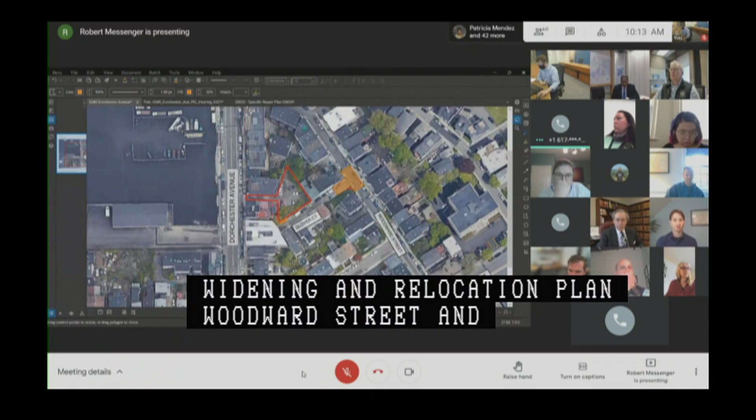This was brought under new business on March 11, 2021, as shown on a plan entitled City of Boston Public Works Department, Engineering Division, Widening and Relocation Plan, Woodward Street and Glover Court, South Boston, one sheet dated March 3, 2021.

Yes, hello, my name is Brian Kaplan. I'm one of the proponents for this. With me here is Robert Messenger, who has shared his screen, and Michael Littman from Howard, Stein, and Hudson. As you mentioned, we have a widening and relocation petition and a specific repairs petition.

So this is related to a site near Andrew Square in South Boston. Woodward Street runs from Dorchester Street to Dorchester Ave, and Glover Court is off of Woodward Street, and it's that intersection of Woodward and Glover that this is focused on. The site in red outline is 9 Glover Court, also known as 534 Dorchester Ave rear, which is the site that we have approved plans to redevelop, and is how we are here today.

I will let Robert go through the specifics of the detail, but I will add that we had a community meeting the other night on this, and previously had talked with Andrew Square and some abutters directly. Everybody was okay with the plan and in support of it. We had no objection. We've got a handful of letters of support, and Linda from the Andrew Square Civic Association, who was at the abutters meeting, was also in support of it.

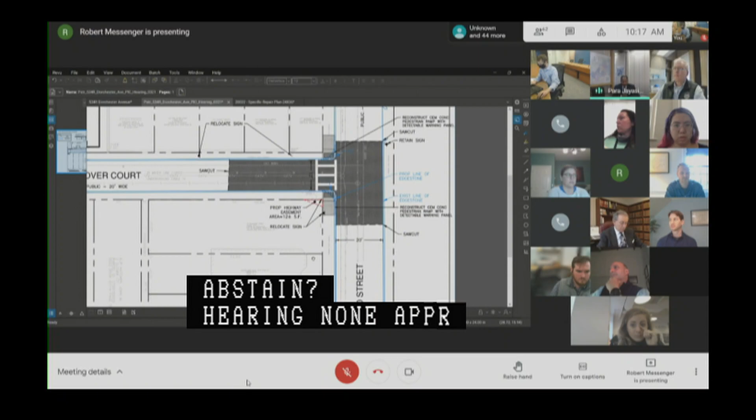On a joint petition by 9 Glover Court LLC and 35 Woodward Street Condominium Trust for the making of specific repairs within the following public ways in South Boston, consisting of curb realignment, sidewalk, and pedestrian ramp reconstruction, as well as new flush crosswalks. Glover Court, generally between address number 9 and Woodward Street, generally at Glover Court. This was brought under new business on March 11th of this year, 2021, as shown on the plan entitled City of Boston Public Works Department, Engineering Division Specific Repair Plan, Woodward Street, Glover Court, 534R Dorchester Ave, South Boston, one sheet dated February 10, 2021.

Thank you. And back to the specific repair illustrative here. The building has frontage along Glover Court, and there is an outdoor parking space that requires a driveway curb cut. So we're proposing a 10-foot wide curb cut to access this space, and it's standard city detail for sidewalks less than 7 feet.

Additionally, the specific repairs we're petitioning were intersection improvements at Woodward Street and Glover Court. And we coordinated with the city agencies after the public hearing. We got feedback from them, which landed on a regrading approach. This would provide better access to Glover Court as well as improve the pedestrian access at the intersection.

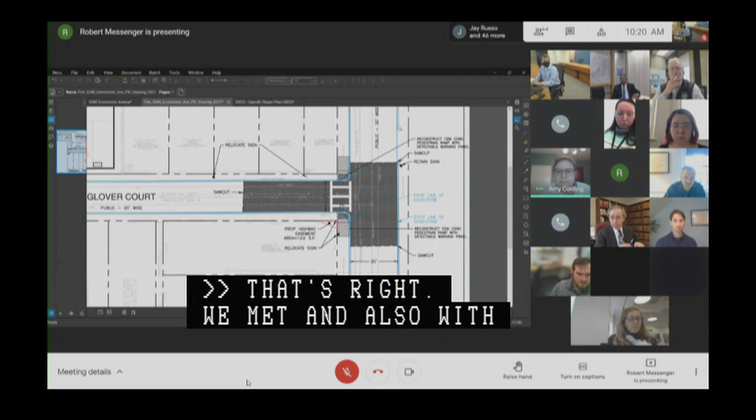Thank you, Bob. So I'm going to assume you have had conversations with the public works staff, because under new business, I believe you were showing either a raised tabletop or a speed hump or something like that, if my memory serves me correctly. Yeah, that's correct. We met with BTD, Todd from PSC Disabilities, and Zach was there. Discussed. Awesome. Okay. Yeah, we landed on this approach and got rid of that previous design.

Thank you, Bob. Appreciate you doing that follow through. Any questions or comments by commission members? Hearing none. Mr. Lining, any comments by PIC staff and or the audience for today? No, all set on both counts.

Then I'd like to hear a motion regarding hearing number 2. I'll make a motion to approve a joint petition by 9 Glover Court LLC and 35 Woodward Street Condominium Trust for the making of specific repairs in Glover Court and Woodward Street as read into the record by the chair. Second. All in favor? Aye. Aye. Anyone opposed or abstain? Hearing none, motion passes. Thank you, Brian.

Thank you. Public hearing number 3 on a joint petition by the Massachusetts Bay Transportation Authority, the City of Boston Transportation Department, and the City of Boston Public Works Department for the making of specific repairs within the following public ways in Roslindale, consisting of curb realignment, sidewalks, and roadway reconstruction, as well as new and relocated pedestrian ramps, specialty pavement, street lights, street trees, street furniture, bike racks, transit information kiosks, and a raised crosswalk. Corinth Street, southeast of Cohasset Street, Cohasset Street at Corinth Street, Poplar Street, south of South Street, South Street at Poplar Street, and Taft Hill Terrace.

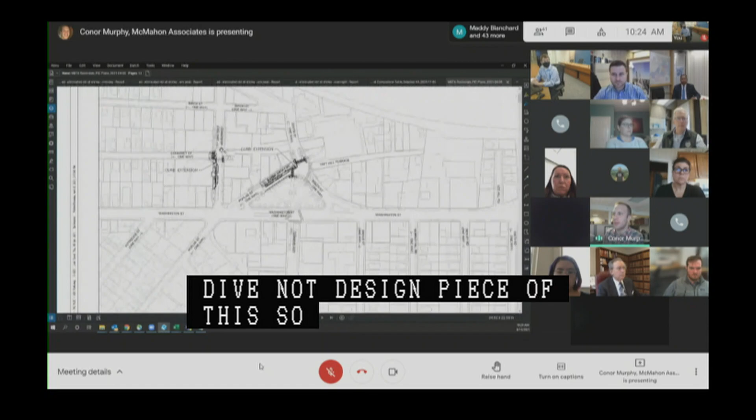It's about a 150-foot proposed curb extension that we're looking to put in on Corinth Street on the far side of Cohasset Street. It's a 6-foot wide curb extension, about 150 feet down. There will be 2 bus berths that we'll be able to fit on this curb extension, shown on the plans here.

There'll be some street lighting changes to push a few street lights against the new proposed curb, based on comments from Public Works Street Lighting Division. We're also shifting a street light at the ramp crossing Corinth Street outside of the ramp berth, improving the ramp in that case as well.

We are also proposing a bus shelter in the middle of the bus stop, placed so it will not block the Bank of America entrance shown right here, and to avoid existing tree pits and other street furniture along Corinth Street. Parks Department has agreed to close the empty tree pit shown here for placement at that location, so we've done the coordination there.

We are also proposing a raised crossing to go across Cohasset Street. This is based on coordination with Public Works Department, BTD, and Disabilities to address design issues including the alignments of the 2 ramps going across Cohasset Street, the path of travel, existing grading along Cohasset and Corinth Street, and the building entrances at both the Bank of America and the Fornax entrances on both sides of the crossing.

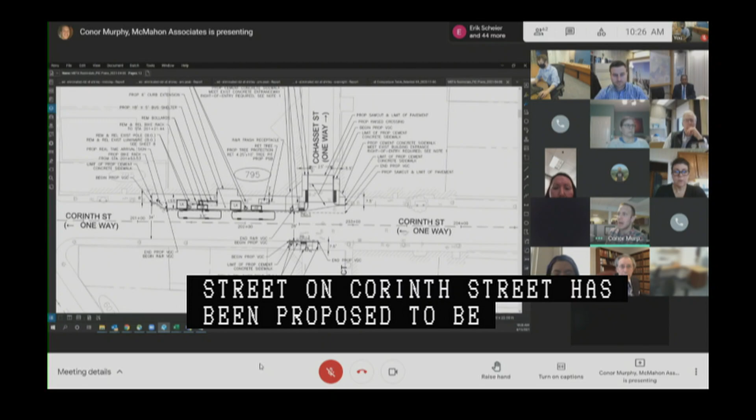The ramp across the street on Corinth Street has been proposed to be reconstructed, with the specific design coordinated with Public Works Department and other agencies to meet needs identified in the coordination process. Since the new business, nothing has really substantially changed at this stop. So that's pretty much what I have here. Are there any questions related to Corinth Street?

Good morning, Connor, Matt. I have a quick question, actually something we sent a comment in about a couple weeks ago. We have a hydrant there near Taft Court, at that handicap ramp, and we prefer to keep the hydrant where it is. So we just want to make sure that it's not in the ramping.

No, this was coordinated with Zach based on that continuity. There's a curb that will be going in to frame that hydrant, so it's not going to be in the flare itself, where the ramp was constructed there. And a detail has been added to the plan set, which I can pull up.

Oh, there it is. And we did add a detail specifically for that ramp to be included in the grading, reflects that as well.

Oh, okay, that's great. When you get a chance, if you don't mind, just send that to us. Yep, absolutely, I can forward it to you. Profiles, no problem, I'll send it over as soon as I'm done talking. After the meeting, yeah, that's fine. Okay, thank you, Connor, appreciate it.

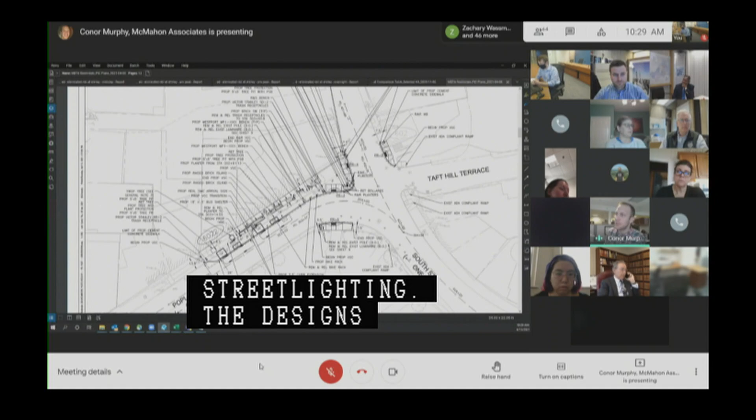entrances at the back of sidewalk where possible, based on the existing grading and whatnot. There was also support from Public Works to retain the aesthetics of existing brick and tree zones. So pedestrian desire lines are basically predetermined based on some of the coordination and what we were looking to do with the existing brick and paths of travel.

So we have raised brick areas here and here, which are shown on the plans. The existing path of travel will be in front and behind those, based on the existing grading challenges, in coordination with Public Works, disabilities, and the MBTA as well.

Curb ramps 3, 4, 5, and 6 have been proposed for reconstruction to realign them based on coordination. Any ramp not shown to be redone here has been checked for ADA compliance and they do pass.

The brick areas adjacent to the layout of benches over here were requested by the BTD transit team, and those are flush with the sidewalk, they are not raised. We did make a couple of slight changes to the amount of curb shown behind the shelter over here, and the layout of a couple of bike racks and whatnot, based on further coordination with Public Works over the last three weeks.

So that's really the only change since new business, and it was agreed upon with Public Works, so there should be no coordination issues with that. It was just us addressing a couple of concerns.

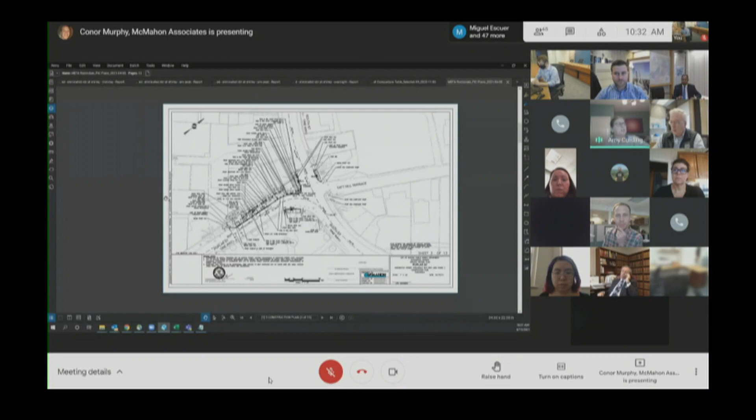At this point, I'd like to entertain a motion on this item. I'll make a motion to approve a joint petition by the Massachusetts Bay Transportation Authority and the City of Boston Transportation Department and the City of Boston Public Works Department for the making of specific repairs in Corinth Street, Cohasset Street, Poplar Street, and South Street, as read in the record by the chair.

Second. All in favor? Aye. Anyone opposed or abstained? Hearing none, motion passes. Thank you, Matt.

Thank you very much. Thank you all.

Next item on the agenda, public hearing number 4, on a petition by Shipway Development LLC for the acceptance of a pedestrian easement adjacent to the following public ways in Dorchester: Dorchester Ave on its easterly side at address number 1700 and 1710, both north and south of King Street, and King Street on both sides east of Dorchester Ave.

This was brought under new business on March 25th of this year, 2021, as shown on a set of plans entitled City of Boston Public Works Department, Engineering Division Pedestrian Easement Plan, 1700 Dorchester Ave, 1710 Dorchester Ave, Dorchester, 2 sheets dated March 15, 2021.

Good morning. My name is James Downing from Howard Stein Hudson, joined this morning by Maddy Blanchard, also from Howard Stein Hudson. We're the project engineers, joined as well on the call today by Patrick Mahoney from Shipway Development, who's the petitioner. We are here to present the pedestrian easement for 1700 and 1710 Dorchester Avenue.

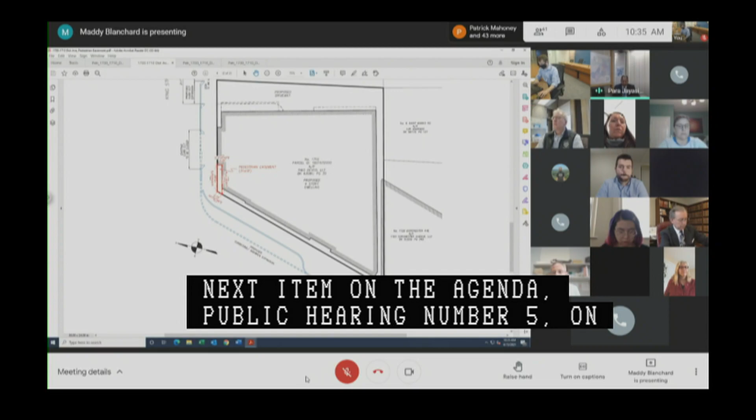Next item on the agenda, public hearing number 5, on a petition by Shipway Development LLC for the making of specific repairs within the following public ways in Dorchester, consisting of curb realignment, sidewalk reconstruction, as well as new and relocated pedestrian ramps, specialty pavement, street lights, bike racks, and driveway curb cuts. Dorchester Ave on its easterly side at address number 1700 and 1710, both north and south of King Street, on both sides east of Dorchester Ave.

This was brought under new business on March 25th of this year, as shown on a set of plans entitled City of Boston Public Works Department, Engineering Division, Specific Repair Plans, Dorchester Ave and King Street, 1700 and 1710 Dorchester Ave, Dorchester, 2 sheets dated February 26, 2021.

James. Good morning, James Downing, Howard Stein Hudson, joined by Maddy Blanchard, also from Howard Stein Hudson, and Pat from Shipway Development, who's the petitioner. We're here to present the specific repairs for developments at 1700 and 1710 Dorchester Avenue.

The project consists of the construction of 2 separate buildings either side of King Street. Right now, we're looking at the location of 1700 Dorchester Avenue, which consists of a 4-story building with a combined unit count of 36 units with 20 parking spaces.

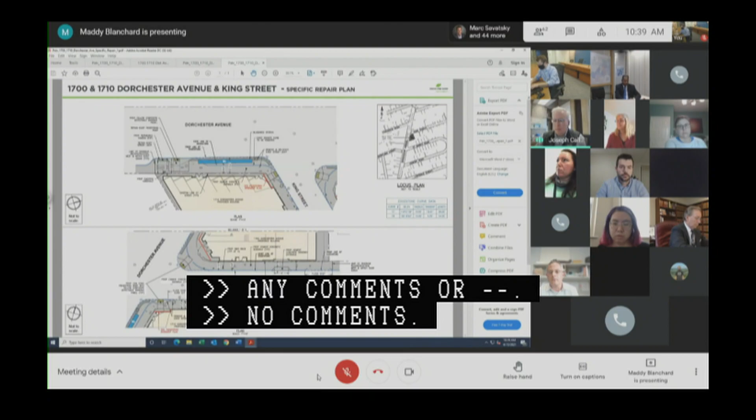I'd like to hear a motion regarding public hearing number 5. I make a motion to approve a petition by Shipway Development LLC for specific repairs in the area of Dorchester Avenue and King Street as further read into the record by the chair. Second. All in favor? Aye. Anyone opposed or abstain? Hearing none, motion passes. Thank you, James. Wish you the best. Thank you.

Next item on the agenda, public hearing number 6 on a petition by WBA Townhomes LLC for the acceptance of a pedestrian easement adjacent to Gardner Street, Public Way, West Roxbury, located on its southwesterly side at address number 178, generally northwest of VFW Parkway. This was brought under new business on March 25th, 2021, and shown on the plan entitled City of Boston Public Works Department, Engineering Division Pedestrian Easement Plan, 178 Gardner Street, West Roxbury, 1 sheet dated December 21, 2020.

Good morning, James Downing again. I'm joined this morning by Maddy Blanchard from Howard Stein Hudson. Also on the call today is Peter Davos, principal from Townhomes. We're here to present the pedestrian easement associated with development at 178 Gardner Street. The project consists of the construction of 2 3-story buildings, which would include 18 townhomes and 36 off-street parking spaces. Next slide, please, Maddie.

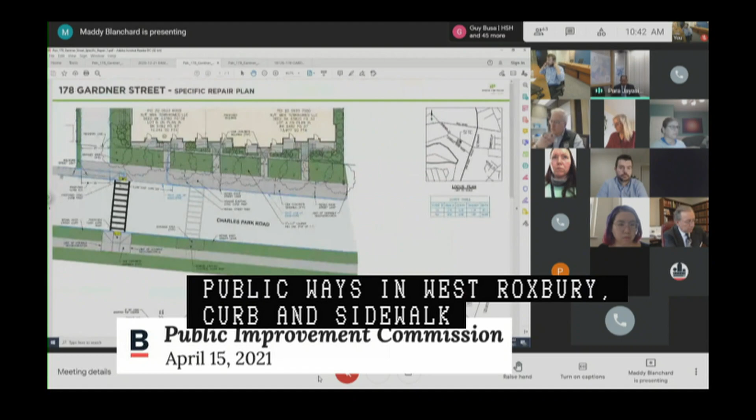Next item, public hearing number 7 on a petition by WBA Townhomes LLC for the making of specific repairs within the following public ways in Roslindale, consisting of curb and sidewalk reconstruction, as well as new and relocated pedestrian ramps, street lights, street trees, landscaping, and driveway curb cuts. Gardner Street on its southwesterly side at address number 178, generally northwest of VFW Parkway, Charles Park Road, and northeasterly side, generally northwest of VFW Parkway. This was shown under new business on March 25, 2021, and shown in the plans entitled City of Boston Public Works Department, Engineering Division Specific Repair Plan, Gardner Street, Charles Park Road, 178 Gardner Street, West Roxbury, 2 sheets dated March 16, 2021.

Good morning, James Downing, Howard Stein Hudson, joined by Maddy Blanchard, also from Howard Stein Hudson, on the call, as well as Peter Davos, principal from WBA Townhomes. We're here to present the specific repair plans for 178 Gardner Street. The project is located in the West Roxbury neighborhood. The site is bounded by Gardner Street to the north and Charles Park Road to the south.

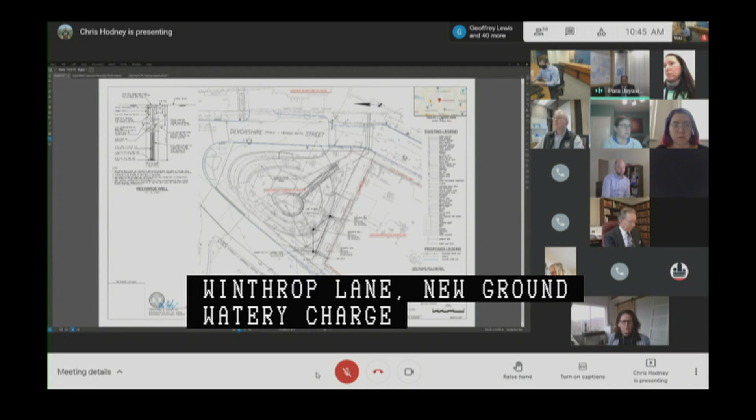Next item, public hearing number 8 on a petition by NFL SRE 1 Winthrop Square LLC for the making of specific repairs within Winthrop Square Public Way, Boston proper, located at address number 1, generally south of Winthrop Lane, consisting of new groundwater recharge infrastructure. This was shown under new business March 26th of this year, as shown in the plan entitled City of Boston Public Works Department Engineering Division specific repairs 1 Winthrop Square, Boston proper, dated March 28th.

I am getting feedback. Todd? Yes, sir. I'm getting feedback on this. He's probably on the line. Yep, Chris, I actually think that may be you. If you can just mute yourself until the presentation is all done, then unmute yourself to present. Thank you, sir. Appreciate it. Thank you, Todd.

Petition, if you could take it from here. All right, so this is, excuse me, Chris Hodney with Edge Engineering. I'm assuming you can see the plan on my screen right now. I'm here with Paul Asmar from Van Fung. Paul, are you there? Yes, I am. I'm just trying to keep my microphone off and listening to you. I'll mute while you're talking. Okay, I am here. I hope you can hear me now. Yes, Paul, you're good. Okay, great. Thank you.

All right, so the specific repair plan that we have is for 1 Winthrop Square. As I stated last time, this is not the currently underway project for the Winthrop Center Tower or the work being undertaken in the park. It's for the 1 Winthrop Square site here. The building itself is having some interior renovations done, which tripped the Boston Water and Sewer recharge requirement. The building has 2 levels of basement underneath, including a basement that extends out to the sidewalk and into Winthrop Square Park around the edge, as is typical in this part of the city.

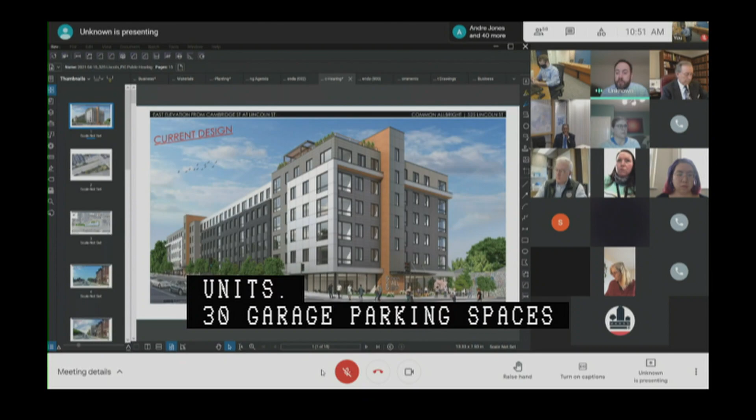That's an image of the project itself. The project is a 6-story residential project, 80 units, 30 garage parking spaces, a very bike-centric project, so 278 bicycle parking spaces associated with the project, and there's a new blue bike station proposed, a 19-stall station that we'll see in a second.

Clicking through the project just to get people acquainted, this is Cambridge Street. At the bottom, you can see I-90, with an overpass of Cambridge Street over I-90. Then Lincoln Street wraps around the project site. You can see the sidewalks today, they're there, but they're pretty bare, somewhere in the 4 to 7 foot range of what's out there today.

Just a quick graphical image so you can see the scope of improvements. The project limits are here, opposite Royal Street, and then we're showing there's some parkland just off to the side here - sorry, not DOT, it's city owned. The project is here, and we're improving the entire frontage, incorporating complete streets and street trees, and several other improvements I'll run through quickly.

I won't spend a lot of time on these slides, but these are just some existing and proposed images to give you a feel for the goals of the project. Again, this is Cambridge Street along that frontage. A lot of time with the BCDC talking about what the private side of the frontage is that abuts the public sidewalk. So we have a lot of grade change on Cambridge Street, and a lot of these tiered plazas that we've incorporated to break the grade up and give that urban feel and a much nicer pedestrian experience than the current sidewalk condition.

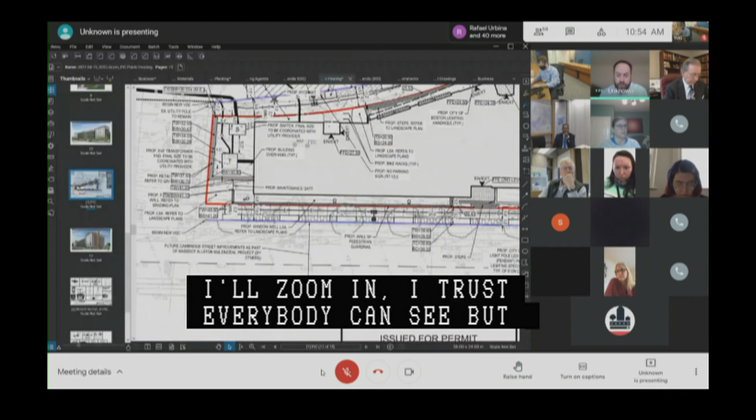The petition is for specific repairs on those two streets, Cambridge and Lincoln Street. So I'll zoom in - I trust everybody can see, but let me know if not. This is Cambridge Street starting closer to the bridge and then working down the hill.

We're getting back to matching the existing sidewalk width. We have a 5.3 foot sidewalk with 3 foot deep, 8 foot wide tree pits, with very standard 30-foot spacing. We introduced 24 new street trees that don't exist today, and 12 new decorative light poles. You can see one of the light poles here, wrapping all the way around the perimeter, with street trees and decorative light poles at approximately 90-foot spacing along the frontage, Cambridge Street and Lincoln.

We have a little bit of a road change, so that treatment comes all the way down here. We do restripe this sidewalk. There have been some signal improvements recently by the city at this area, so we think it's in good shape. We did hear a concern with the loops, that they might not be working appropriately. In conversation with BTD, we believe they may be recently upgraded, but we did add into the scope to put new loop detectors in when we do our paving, which makes sense since we are milling and overlaying this section.

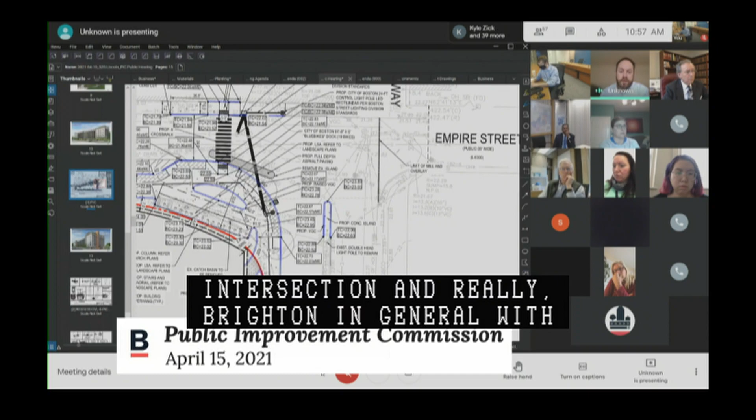One of the key points was Lincoln Street and how do we calm traffic, slow things down. We heard that in the Allston Brighton mobility study, as well as through our community process and our BPDA process, the neighborhood and city alike were asking for some mitigation or traffic calming measures. So we're pulling this curb line way out to shrink this to a more reasonable width and radius at this intersection. It goes down to a 24-foot width here, and that's where we pull that curb line out and get rid of this.

There is an island in the middle today that goes away, and this becomes a more traditional intersection. Still very generous for truck movements and things like that that may need to occur here, but much tighter and better controlled, and this island is part of it.

But really, the curb line's the bigger move, and one of the benefits is it allows us to introduce this crossing now at a much more pedestrian scale. Instead of crossing approximately 50 to 60 feet, we've shortened that to a 24-foot crossing. So much needed improvement there for pedestrian access, and we introduce a corresponding ramp on the other side.

On the Boston Lighting side, this was very important to them, the lighting system is very stressed in this area, with a lot of development and improvements introducing decorative lighting, sometimes to supplement or replace the old high pole lighting. So to do that, they didn't have sufficient power to add all the decorative lighting we're proposing, and frankly they didn't have enough to do what they wanted elsewhere in the system.

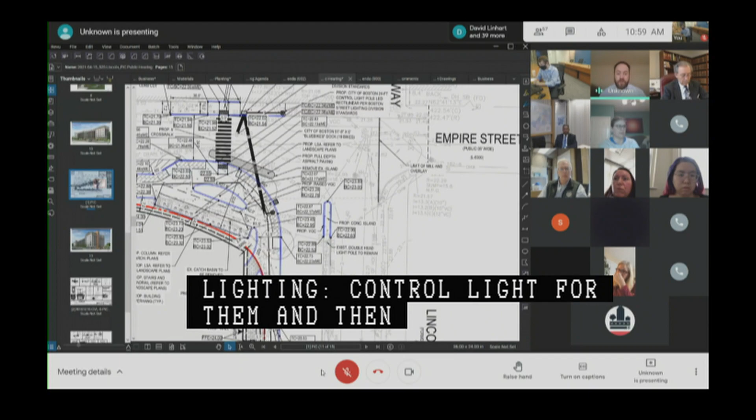So we're pulling new power out of this manhole to a new control box for Boston Lighting, introducing another light over here as a control light for them, and then feeding back across to our side to feed the lights on our project, continuing with measures for them to keep increasing their lighting along Cambridge Street. This box and control light are meant to continue servicing whether it goes up Empire Street or on the opposite side of Lincoln Street. So very important to Boston Lighting to get some of those improvements incorporated as part of the project.

Also at this intersection, we're taking advantage of the space here to put the 19 station blue bike in a very visible spot. We think it's a nice way to do this particular station because we've really put the walkway on the outside, so this is more the heavy traffic flow. If you have a lot of pedestrian activity at the same time as a lot of blue bike activity, the blue bikes have their own zone separate from the main walking path.

So really good use of this space, and we've introduced a raised planter in the middle to break that up and break down the scale of the sidewalk width there. We think that's very effective. Then back to a more traditional treatment of street trees and impervious pavers, with generally a 6.5 to 7 foot sidewalk width along the remainder of Lincoln Street, tapering back down to meet the 7 foot concrete sidewalk at the property line. So that's a lot of frontage here, but hopefully a good overview of what we're trying to accomplish and how we've done that.

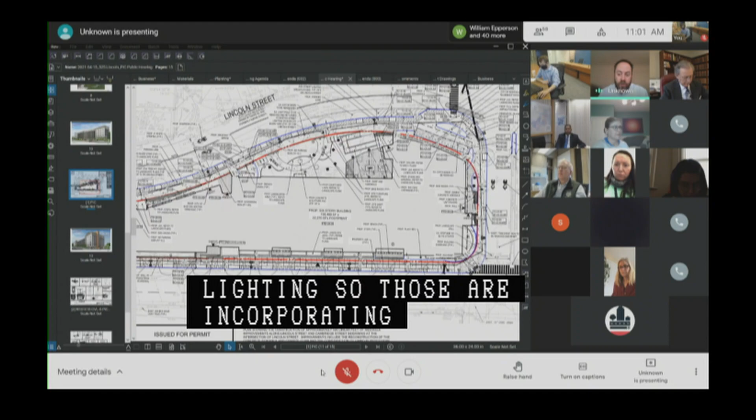We do have stormwater systems on site on the private property, the 1.25 inch Boston Water and Sewer infiltration system, so that works well. We have the shadow fiber conduits following those, the lighting conduits, so those are incorporated in the plans. The limits of mill and overlay along Lincoln Street, full curb to curb, are on the plans. I mentioned the new loop detectors as well.

And with that, I'll open it up. If there's any questions for me or ownership or legal counsel, we're happy to answer any questions.

Thank you, Steve. I appreciate that very thorough presentation.

Steve, I have a small point, and I'm a bit embarrassed that I didn't catch it the last time. Could you move your screen so it is at the intersection of Lincoln? Yeah, right there, perfect, don't go too much. Actually, if you could zoom back a little bit. So my point, and I need Amy's guidance on this.

There's a median currently along Lincoln Street as it comes towards Cambridge Street, correct? There's a median, correct, right. At the top end of your screen, the blue color markings where you are adjusting right there. So that median, the limits of it may have made sense when we had that wide intersection, but now that you've tightened the intersection, do you see any value in extending the limits of that median a little bit to the northern part, to the top of your screen? That way, traffic coming off Cambridge from Lincoln to the Empire intersection is more of a defined area rather than a free-for-all.

Amy, did I miss anything? That's the blue line - the median island's going out with the curb line. Can it be extended even further up to align with the straight line of Empire Street, when you think about the sidewalks? I think it can go up a little bit, though I hate to do this now. The concern is not sticking over the crosswalk - bring it up a little. It's a really crude drawing, but you captured what I'm trying to mumble here.

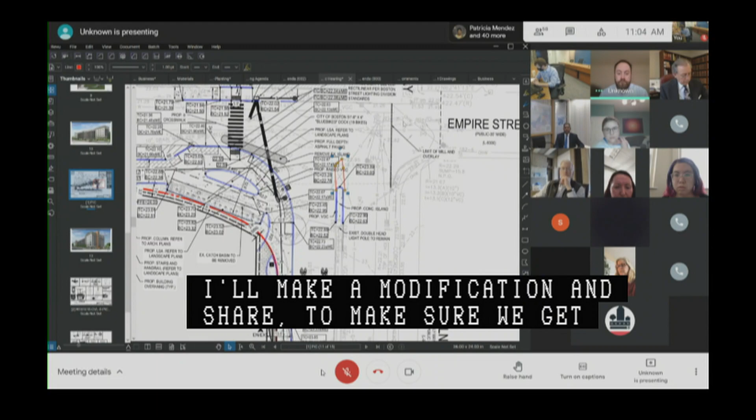Steve, I appreciate that consideration on your part. Sure. Any other comments by fellow commission members? Oh, good morning, I just had a quick comment.

So at Lincoln and Cambridge Street, you have a note for an existing catch basin to be converted to a drain manhole with new frame and cover. I just want to check, were you trying to install a drop inlet? We are - it's a really shallow one, so we're putting a drop inlet here, and that's where the current catch basin is.

Just with this curb line moving out, there were some shallow conditions there, and we thought this would be the best situation. So that's the intent there. Oh okay, great - if you could just put that note on the drawing, that would be great. Sure, yeah, absolutely, thank you.

And then just a small minor thing - I know you brought it up last time - are you continuing to work with our department on the site plan, through the site plan review process? Yes, yeah, absolutely we are. Thank you, and we'll make sure that gets into the Boston Water and Sewer drawings as well. Okay, awesome, thank you. You're welcome. Thank you, Denise. Thank you, Steve.

Any other comments by fellow commission members? Hearing none, before I ask Mr. Liming the status of your maintenance agreement - truly appreciative of all the improvements you are doing. I'm going to assume that there's a very solid maintenance agreement that has been forged and about to be signed, or has been signed, or we are very close to signing. Would that be the case, Mr. Liming? Yes, we're working on a maintenance agreement with them, and I will mention that this maintenance agreement will speak to the snow removal from all of the sidewalks, especially at the corner of Lincoln Street and Empire Street, where you have kind of an inside and outside sidewalk situation with an island in the middle.

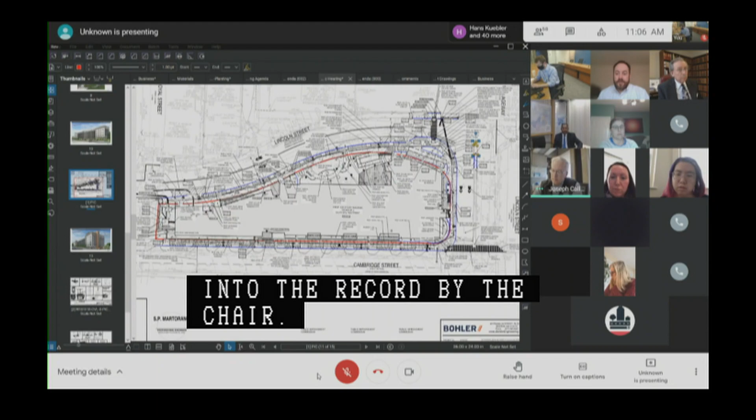That being the state, I'd like to hear a motion regarding public hearing number 9. I make a motion to approve a petition by Albright Realty LLC for specific repairs in the area of Lincoln Street and Cambridge Street, as further read into the record by the chair. Second. All in favor? Aye. Anyone opposed or abstained? Hearing none, motion passes. Thank you, Steve. Thank you, everyone. Thank you very much. Thank you.

Next item on the agenda, public hearing number 10, on a petition by Bartlett Place Land, Inc. for the widening and relocation of the existing right-of-way lines of Lambert Avenue, a public way in Roxbury, located on its southeasterly side between Bartlett Street and Gill Street. This was brought under new business on March 25th of this year, as shown on a plan entitled City of Boston Public Works Department, Engineering Division, Widening and Relocation, Lambert Ave, Public Way, Roxbury, one sheet dated March 10th, 2021. Good morning.

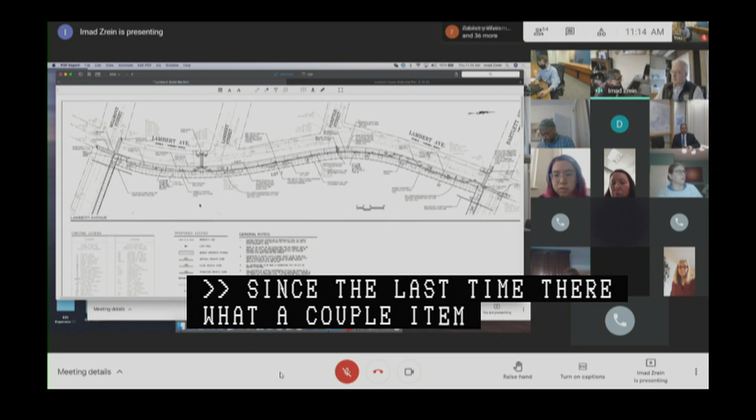Particularly was the radii for the bump outs. As Mr. Liming requested, we changed all those radii to 10-foot radii only coming in and out, as you can see in this bump out here and these bump outs here.

There were also some questions regarding the curb ramps. We've since coordinated with Ms. Long, and we've added some detectable warning on the reciprocal ramp. We've also added an additional ramp along the intersection of Lambert and Bartlett on the reciprocal side to make that more accessible.

The project as a whole, as you can see on this sheet here for Lambert Ave, we are adding those parking spaces we just talked about in the previous hearing. There are 21 parking spaces with new granite curb, street trees, and a 9.5-foot sidewalk.

The rest of the project entails work on Gill Street and Bartlett Street. On those two streets, we're basically extending the phase 1 reconstruction of the sidewalk—reconstruction of the sidewalk, resetting the curb, and adding new street trees where we can within the right-of-way, particularly on Bartlett Street, where we added 5 new trees. That's basically it.

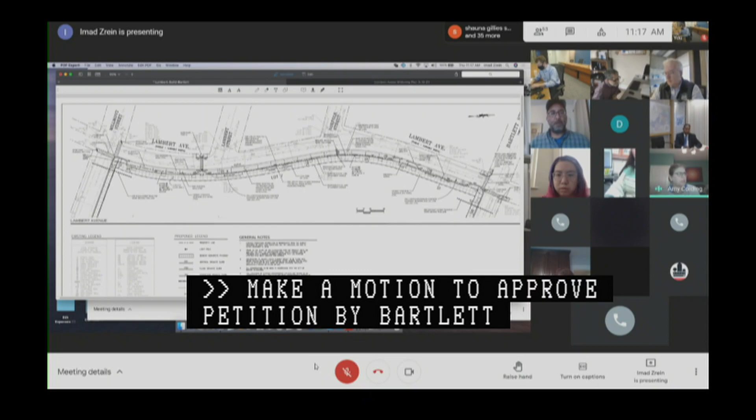Second. Second. All in favor? Aye. Anyone opposed or abstaining? Hearing none, motion passes. Thank you, folks. Thank you, guys.

Thank you. Next item on the agenda, the last public hearing, number 12, on a petition by ExteNet Systems Inc. for a grant of location with lead company status and no participants to install new telecommunication conduits with city shadow duct within the following public ways in East Boston: Maverick Square between Winthrop Street and Sumner Street, Winthrop Street between Paris Street and Maverick Square, Paris Street northeast of Winthrop Square, Sumner Street southeast of Maverick Square.

This was brought under new business on March 25th, 2021, as shown on a set of plans entitled City of Boston Public Works Department Engineering Division Grant of Location Plan, Winthrop Street, Maverick Square, Sumner Street, Boston, 5 sheets dated December 2020.

Good morning, everyone. Dave Gajan with NBNC on behalf of ExteNet, joined by Dan Ryan, NBNC Engineering Manager. Dan is pulling up our project plans.

So as you mentioned, ExteNet is seeking a grant of location for the placement of fiber conduit, city shadow duct. This will be in support of new proposed small cell installations, part of a larger ongoing effort throughout the city for ExteNet, upgrading and expanding their network.

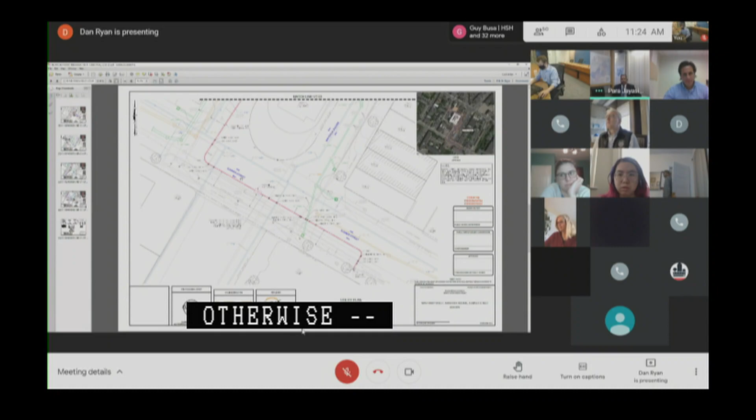All right, so let me see. Questions answered. At this point, I'd like to hear a motion by a commission member.

I'll make a motion to approve a petition by Extenet Systems for a grant of location in Maverick Street, Winthrop Street, Paris Street, and Sumner Street as read into the record by the chair. Second. All in favor, please signify by saying aye. Aye. Aye. Anyone opposed or abstain? Hearing none, motion passes. Thank you, folks.

At this point, we'll move to the new segment of our agenda. First item, Franklin Street, Boston proper, specific repairs on a petition by MCAF Winthrop LLC.

Thank you, Para. Hi, Kathy. I'm just trying to present. Kathy McNeil, my colleague Halle will pull up our presentation for what's addressed as 1 Franklin Street here, but which many of you may know as the Tontine Crescent. So, Halle, thank you. Yep.

Good afternoon, my name is Halle Thomas. I represent MCAF Winthrop, a division of Millennium Partners. I'm here today with Kathy McNeil, who just introduced herself. We are currently building the Winthrop Square building, just a couple blocks down and around the corner. We are here today with our landscape architects for the project, Shauna Gilles Smith and Curtis Puncher from Ground Landscape Architects. We are also joined by Robbie Burgess and Hans Kubler of Howard Stein Hudson, Brian Taff and Jessica Fernandez of Suffolk Construction, and Elnita Laracell of the Downtown Improvement District. So we are here today presenting the permanent construction of Tontine Crescent on Franklin Street and Downtown Crossing.

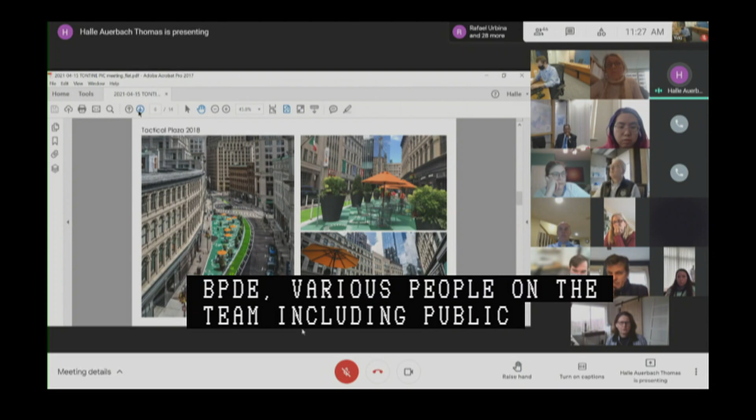After this was constructed, we did a series of traffic studies and parking studies to confirm this geometry worked. So now we are here today to present the permanent construction of that plaza. From here, I will hand it over to Shauna Ground to present the design.

Thank you very much, Halle, and hello everyone. As you can see on the screen, this is the plan of the permanent condition. With a very minor modification that Robbie will go into in a moment, the geometry follows the tactical test case that Millennium Partners, along with the City of Boston, constructed for the plaza.

Along the outboard of the plaza is a raised cycle track. The plaza is at the level of the sidewalk, leaving the existing sidewalk with the cobblestones intact, and adjacent to that is a new poured concrete sidewalk, providing a very smooth surface all the way through the plaza to the terminus at the Hawley corner.

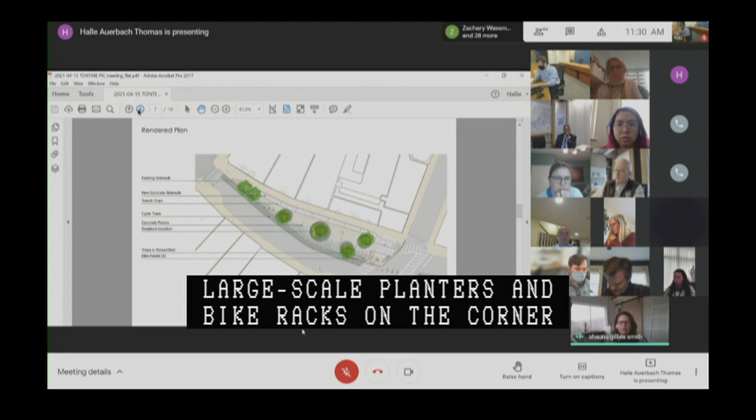An existing sculpture that was located in the middle of Franklin Street is being relocated in the middle of one of the planters, and that has been reviewed with the Art Commission.

Perhaps we could go to the next image. This gives a sense of what that feels like. You can see that the planters have a little bit of an asymmetrical seating arrangement, but there's a lot of space in between them for both movement and for the BID to set up temporary tables and chairs.

And an idea of what the planting would be. The tree species relate to the elms that are in Shoppers Park, they'll be in structural soil as well, and then there will be flowering perennials and low ground cover.

And then moving over to Robbie or Hans to go into the more specific design of the improvements. Thank you, Shauna.

Mr. Burgess from Howard Stein, I think you are on. Sorry, I was muted. Good morning. My name is Robbie Burgess from Howard Stein Hudson. Thank you, Mr. Chairperson and Commission members, for considering this project today.

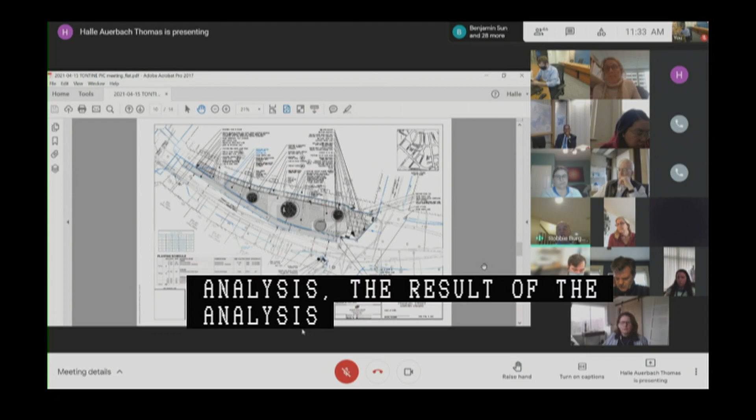This data and the analysis confirmed that the Tontine Crescent Plaza provides significant public benefits without negative impacts to the functionality of the roadway network.

So without being redundant, I'll go over some of the civil engineering elements of the plan. Moving outwards from the building face, we first have the existing granite sidewalk. These are granite slabs over areaways, or hollow sidewalks. Within these areaways are building-side utility services like gas meters, water services, etc.

We studied these granite slabs, and it was determined that it was too much of an impact to try to replace them, and there was a desire to maintain some historical relevancy of this type of material. So to address the irregularities of the granite slabs, the project proposes a cement concrete path of travel with saw cut joints, ADA compliant, adjacent to the existing granite walkway. The result is about 15 feet of walking space combined between the building frontage and the plaza area, a generous and compliant path of travel.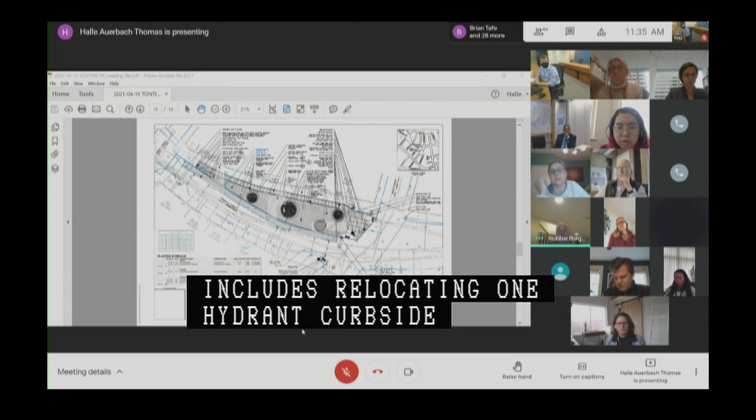We coordinated with water and sewer. The project proposes to relocate 1 existing hydrant curbside to within the new plaza on the northwest corner, and we are also proposing 1 drop inlet and sump drainage component as requested by water and sewer. The plaza drainage, a trench drain that runs most of the length of the plaza, will not be maintained by the city. So an important distinction there.

We also coordinated with Boston Transportation. The project proposes to remove the existing overhead mast arm and replace it with 10-foot signal posts, which is more consistent with a plaza experience than the steel overhead mast arm. We are also proposing a grade separated cycle track that will replace the existing at-grade bike lane. Currently, we have a full set of pavement markings, signage, and traffic signals.

Traffic signals coordinated with Boston Transportation Department at the 25/75% design level. We also coordinated with the mayor's office for persons with disabilities.

This coordination resulted in several improvements. First, the separation of the apex ramp on the northwest corner of Franklin Street into 2 perpendicular ramps. And on the southwest corner of the intersection, we are relocating a traffic signal post so that we can reconstruct a compliant ramp at that location also.

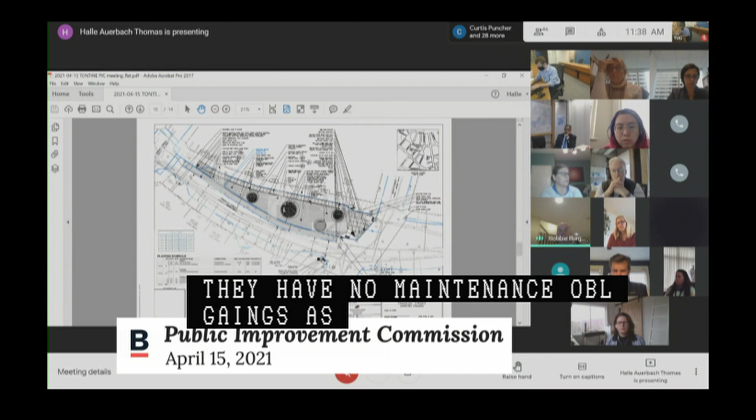We also reached out to the Parks Department and are happy to entertain any comments they may have. But an important distinction is that they have no maintenance obligations as part of the Tontine Crescent. It's all covered under the license, maintenance, and indemnification agreement.

In addition to the specific repair plans, we have 9 sheets of construction details to provide information on how we plan to construct all the elements, protect utilities, and build the project.

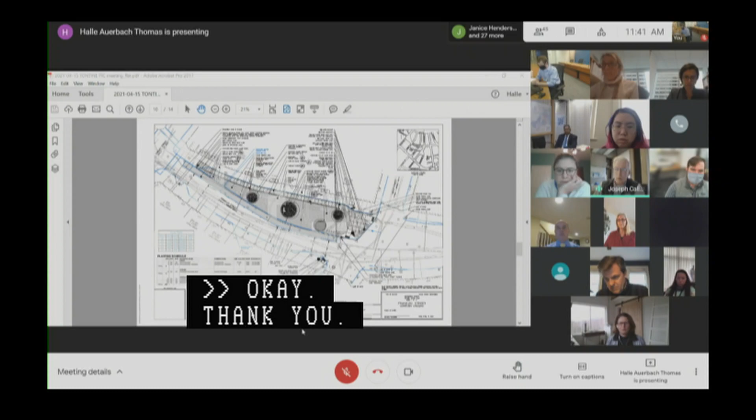Okay, thank you. Snow plows coming up could conceivably push snow onto the plaza, but as of right now there's no plan to allow piles to accumulate. I hope there's no plan to - if we get a heavy snowstorm and some plows may push snow there - just that there's no intent to let piles accumulate that could block sight views.

No, the intention is - and I said that we may not completely remove snow from this area - but it's not intended to be a stockpile location in any way, shape, or form. And the trench drain should help facilitate that. Should snow start to pile up, we could use the heat guns to melt it. Thank you.

Any other comments by commission members? Yes, Brian Horan, Inspectional Services Department. Go ahead, Brian. I had just a question.

We are currently prosecuting the owner of 50 Franklin Street as well. So is this park - I don't know how close this proposed area is - there's a sidewalk vault areaway issue directly across from it, which I'm not sure how far the infrastructure goes under the street and under this particular project.

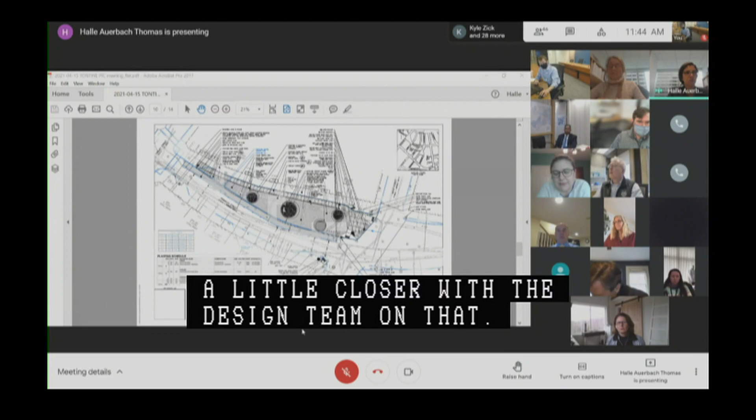Yeah, we're starting - we have slightly modified the design from when we were previously looking at this, and we're starting our construction outside of the existing sidewalk. So we're not touching any sidewalk that is vaulted. Okay.

If it would be possible, could you get me in touch with the contractor? Definitely, yep. Okay, just have them forward - or if you want to send me an email, or if you want to just forward my information to them - and I'll bring them up to speed on where we are. Yeah.

Thank you, Brian. Any other comments by fellow commission members? Yes, I'd like to thank the team for their presentation. I think the newly expanded concrete sidewalk will be a great improvement to the area, especially in terms of connectivity and accessibility for people with disabilities.

I just wanted to note that there is one outstanding item from our initial comments about the reciprocal ramp as you will cross Arch Street. So we just want to verify the compliance of that reciprocal ramp, and or if that ramp may need an AAB variance for compliance.

Yes, thank you, sorry, I omitted that part. Yes, we looked at that ramp that you mentioned, and it is non-compliant currently. And that area also has hollow sidewalks or areaways underneath, combined with utilities right at the corner - there's an Eversource vault. So we are preparing a variance application. We're just awaiting signatures to submit it.

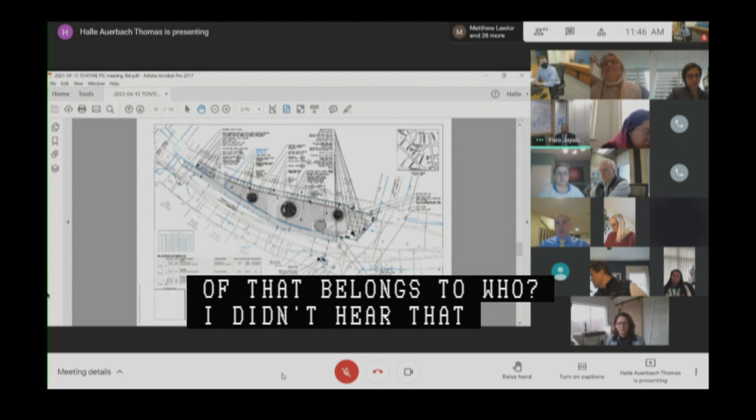Robbie, I have a couple of thoughts, just need a point of clarification. Let's start with the trench drain in the middle - did you say the maintenance of that belongs to whom? I didn't hear that part clearly. It does not belong to the city. So not the city's responsibility - who is going to look after that? Kathy? So that's part of the negotiations. Okay, so you are in those conversations with Anita's team, Rosemary's team.

Because today, I was listening to your testimony, and you said you all studied the traffic flow conditions and all of that, but that was when this bicycle track was flush with the roadway. Now this is going to be raised, effectively narrowing the roadway width. So from a fire department perspective, 14.5 feet is not the standard we use for limiting the driving width, the roadway width. So could you add some clarification as to how we've gone from something that is about 18 to 20 feet, which is what the fire department wants, to something that is 14.5?

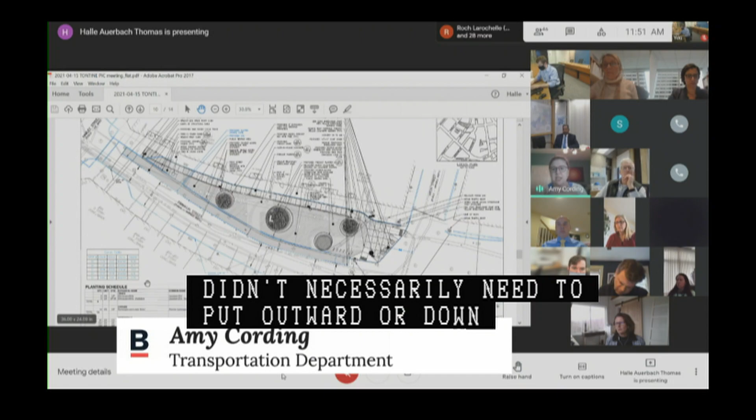Paul, so just to add to this - at the beginning of the temporary stage, we went all the way with the fire department. We brought trucks out here, put the ladders up, spent a lot of time with multiple apparatus deploying ladders and stuff. So I agree we could go back to the fire department, but I also agree with Robbie that their primary concern was around the turning, and that they didn't necessarily need to put outriggers down here, which is what that larger dimension is. They wanted to make sure they didn't have any turning issue with their apparatus, which we came and did turns around here for. So I think we should go back to whomever came out with those trucks to confirm they haven't had any problems with it. But we spent a long time at the beginning of the tactical portion to make sure fire was okay.

Thank you for all that pre-work. We are going from a temp situation to a perm situation, and that's the whole function of PIC. When something goes south, they are going to wonder where the records are, so just close the loop. I want a paper trail to ensure that your interest, the city's interest, and the fire department's interests are not compromised, and to not minimize the wonderful work all of you have done to bring it to this point. It's just dotting I's, crossing T's, but be on the same page. That's all I have.

Kathy, I truly appreciate the tremendous work you all are doing with the bid team. Please continue as energized as you are to bring this to a resolution before we entertain a public hearing. I'm absolutely confident if anyone can do it, it's Tony and you and your team. You're all fantastic at this. So, any other comments by PIC staff or audience?

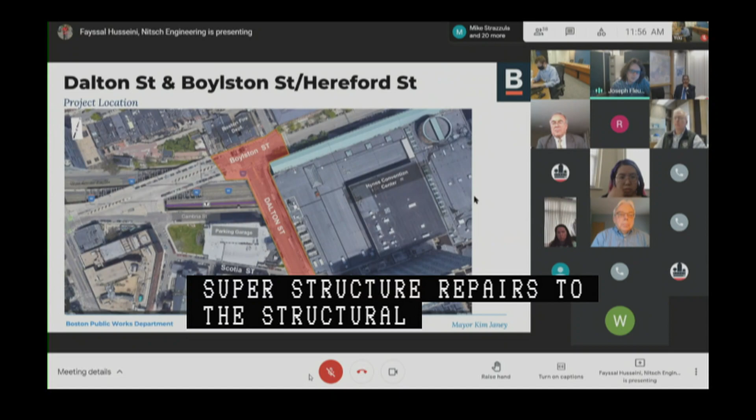Hi, Joe Fleury here, Boston Public Works. I'll give a brief overview of the project and pass it to Fayssal Husseini, our civil and traffic consultant from Nitsch Engineering. We also have Darren Conboy here with Jacobs Engineering in case there are questions on the structural side. Boston Public Works is doing maintenance work on the Dalton Street Bridge, generally in the area of Boylston Street, over the Mass Pike Railroad, and Cambria Street. The project includes substructure repairs to the piers and abutments, superstructure repairs to the structural steel, and deck replacement. As we worked through the design of these repairs, we were asked to perform improvements to the approaches on both Boylston Street and Dalton Street. This is us coming to do the PIC action for those improvements. With that, I'll toss it to Faisal, who will run through the specifics.

Thank you, Joe. Thank you, Mr. Chairman and members of the board, for giving us this opportunity to present this project. As Joe mentioned, this project is really a bridge rehab or reconstruction, and we've added to the limits of the project to provide improvements for ADA accessibility and a multi-mode type access for bicycle lanes, and to improve the sidewalks and conditions in that area. North is up on the screen, and Boylston Street runs east-west. The highlighted area is the limit of the project, and Hereford Street is right at the corner of the Boston Fire Department, which is at the center of it. The limits of the project on Dalton extend up to Scotia Street.

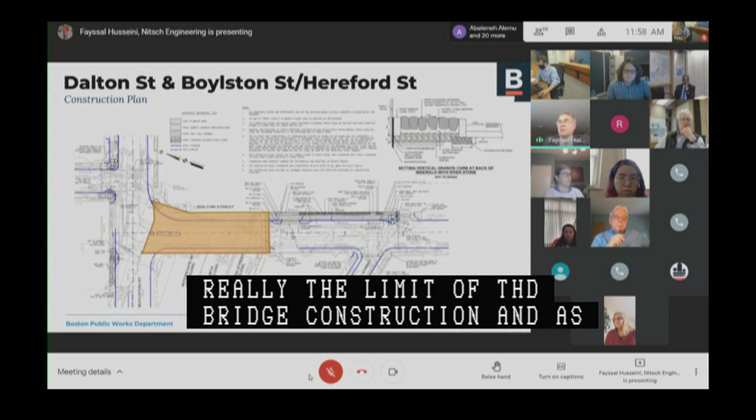The highlighted area is the limit of the bridge construction, and it runs right on top of the I-90, the MBTA lines, and also the ramp that goes below the Hynes at the loading dock area.

Starting at the east, on the limit of Scotia Street for the project, there's this highlighted area, the hatched area against the Hynes building. This was initially planned as a separate project, then combined with this one since they're concurrent.

In this area, because the sidewalk cross slope was so steep, we had to make something to accommodate a clear path that's ADA accessible. As you can see in this detail, we ended up making a small island, curved on both sides, with large river stones around it so it has a use beyond landscaping, like a seating area.

So the sidewalk has some bulb outs to define the parking area. There's a parking area here, and a drive-in for the loading dock into the Hynes itself.

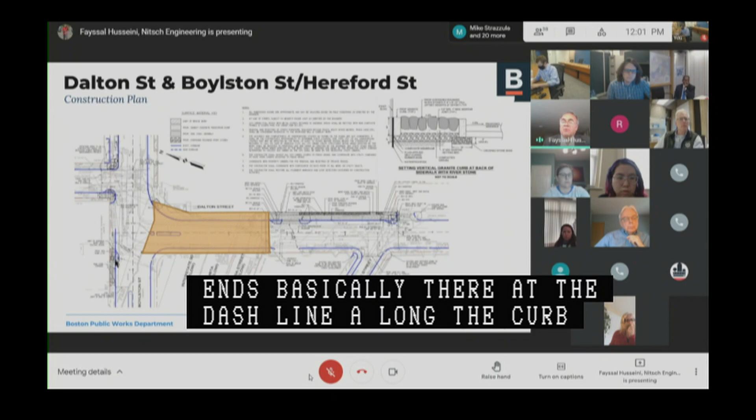Down on this side, the sidewalk was pretty narrow and very challenging to provide for a pedestrian ramp. Since alongside the curb line there's a parking lane, we ended up bulbing out there too, to provide a standard wheelchair ramp that crosses across.

We did an assessment of the existing pedestrian ramps across the street, and they do meet ADA requirements and everything is consistent. You can see the bridge construction limits go right into the intersection itself.

This is the pavement marking and signing, to give you a perspective on the lane arrangements. As you come on Dalton Street, south of Scotia, it's basically 1 lane extending into 2 lanes. All the design work has been based on coordination with the Boston Transportation Department and the Public Works Department.

Then it extends into a left-lane-only and a through-right lane. We maintain the existing bicycle lane on the south side, the west side of Dalton Street, and also provide for bicycle access within the signalized intersection.

This is a signalized intersection. As you can see, the crosswalks will be established to provide nice and good circulation within the area. Boylston Street is one-way in this direction, and Hereford is one-way away from the intersection itself.

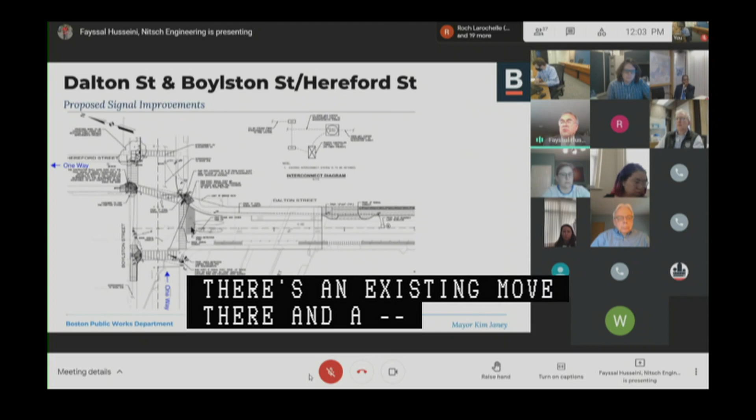We are putting it on the side, adding a post with a signal head and a pedestrian signal head. Also across the street, we're having another post that will be 16 feet high, which will also hold the video detection on the bridge itself.

Other than that, we are not doing much, basically, for the signal equipment.

And basically, this is in a nutshell an overview of the project. Thank you, Faisal. Any comments by commission members?

I just want to quickly note that our commission had sent comments yesterday, so we certainly don't expect them to be reflected in these plans. But one notable request is that on the south side of that intersection, if it's feasible to achieve 2 ramps on each corner, just to make the crossings a little bit more straightforward as you cross Boylston Street. But we can certainly coordinate between the 2 weeks between new business and public hearing.

Yes, Sarah, we're happy to have those discussions. The only thing I want to point out is the south side of this intersection. That pedestrian ramp is actually on a MassDOT bridge, so we really do not want to touch that if at all possible, just crossing jurisdictional lines. So where Faisal's pointing right now, we can certainly have that discussion. I'm happy to take a look at that. But on the other corner, I'm just loath to get into the DOT bridge.

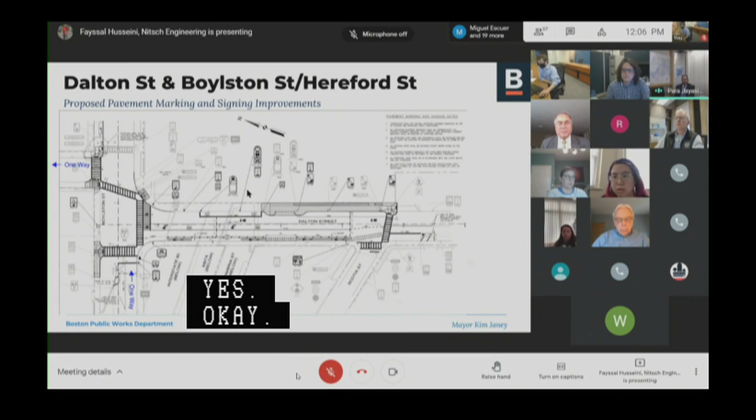Okay, just for the record, the surface work is part of a multi-million-dollar bridge project. I always like when bridge projects that are $20-30 million translate to some work on the street. Joseph, roughly how much are you spending on the bridge itself, the Dalton Street Bridge project? Closer to 15. Good Lord.

Okay. All right. Good stuff, everyone, all around. So we will mark this thing up for 2 weeks, which would be April 29? 29. Thank you, sir.

Thank you, everyone. Next item, new business item number 3, Beacon Street, Park Street, Bowdoin Street, Boston proper, specific repairs on a petition by City of Boston Public Works Department.

Good morning, commissioners. Thank you for allowing us to present today. My name is Zach Wassmer. I'm Chief Design Engineer for the Public Works Department. I'm joined by Fayssal Husseini from Nitsch Engineering, who is the consultant that the city has hired to work on this design. I'll just give a brief introduction and then I'll kick it over to Faisal to bring up the presentation to present the details. But we're very excited to present this project.

This has been a long-standing issue out here at this intersection as far as pedestrian space and accessibility for accessing. It's right along the Freedom Trail. It's in front of the Shaw Memorial. It's next to the Common across from the State House and everything. So it's a high pedestrian traffic area, and we want to make some improvements here to make this safer for pedestrians and all users.

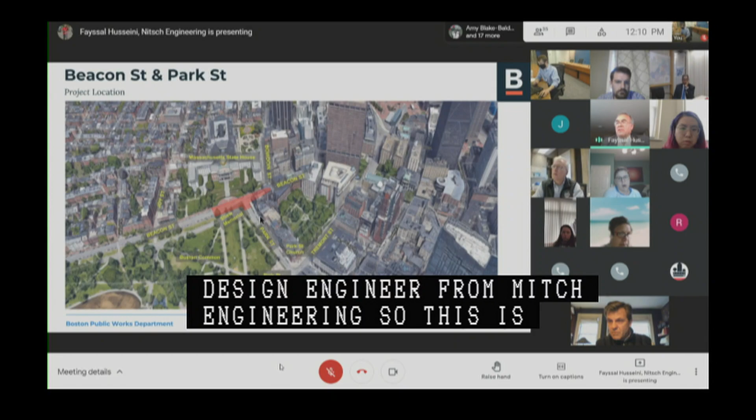Thank you, Zach, Mr. Chairman, and members of the board. My name is Fayssal Husseini, and we are the design engineer from Nitsch Engineering. This is the project location area highlighted in red, and you can see the surrounding is right in front of the State House. As Zach mentioned, the location is a very significant and critical location for the city.

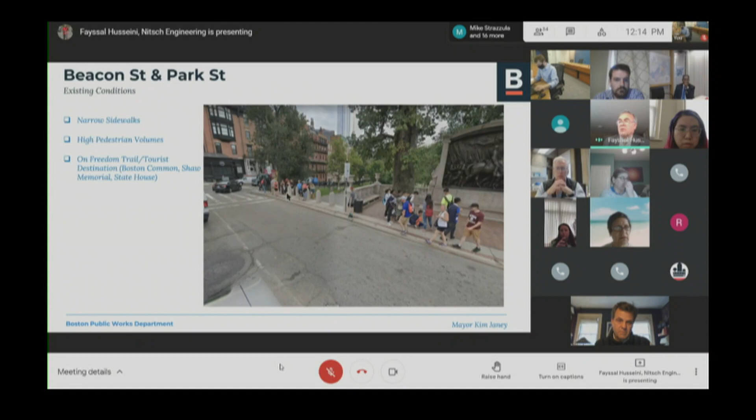This is looking back at the stairs coming from the common, where a large volume of people wait, trying to wait for the signal to cross the street. The Shaw Plaza is also a very popular destination - a lot of people gather around that area, and sometimes they have to walk into the street to continue on the sidewalk and avoid other people enjoying the plaza.

So the goal is really, as we said, to widen that sidewalk and delineate the Freedom Trail. The Freedom Trail will be shifted a distance ranging between about 6 and 8 feet in this area.

This is the overall layout of the project for the material use and also for the delineation and painting. For the Freedom Trail itself, the material alongside the State House is going to be brick. For the tactile at the ramps, we're using cast iron steel, colored red. We're also proposing the material for the Freedom Trail as we coordinate with the Freedom Trail people.

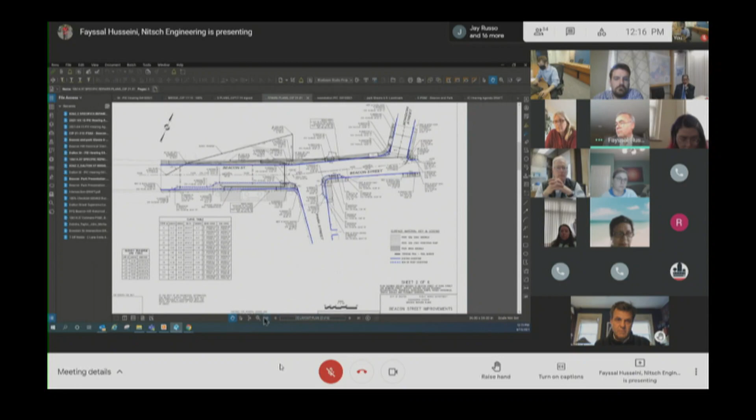So this is the PIC plan, and you can see the curb being moved out on the Boston Common side, the east side, for that distance. Now instead of having the 4-foot walkways, we have 15 feet, and then that goes down to 8.5 feet in this area, and then back to 4 foot to match the existing.

We are tightening the curve in this area because, as I said, Bowdoin is one way, and that makes things possible for large buses turning so it does not interfere with that radius.

We also have, again, to improve two pedestrian ramps and improve crossings. We are doing a bulb out on this southeast corner of Park and Beacon.

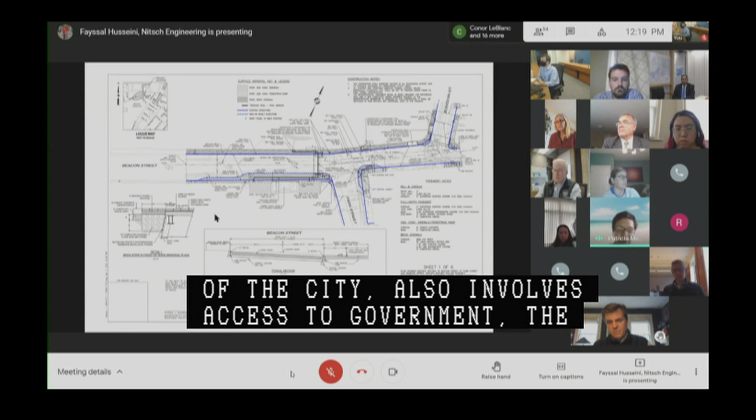I work for the Disabilities Commission, and I just want to mention that we are sharing the excitement for this project in support. We are working closely with Zach and his team, and there are many conversations. We strongly believe this is important for the location, which involves the history of the city and also access to government at the State House. So we're super excited and working very closely regarding all the details, coordination, and materials. Thank you.

Patricia, thank you for all your support, your guidance, and your engagement. It is valuable to support the efforts that Zach and his team are trying to do, which is to make Boston better than any other place. So my thanks and gratitude to all of you. Yes, thank you, Patricia. You're welcome.

Any other comments? Yes, Rob Whitney. Sorry, hello, yeah, I'm Rob Whitney, I'm the chair of the board of the Beacon Hill Civic Association. I also want to applaud the city on this design.

The Civic Association has always been strongly in favor of increasing access for persons with disabilities within the historic district, and portions of this plan include parts within the Beacon Hill Historic District. I also wanted to thank Zach as well and the BTD for working with us on trying to make some improvements to the design, particularly with respect to some of the materials we've been recently discussing and are going to continue to discuss to make a great plan.

I also wanted to let the commission know there is an agreement between the city and the Civic Association with respect to sidewalk improvements and intersection improvements within the historic district, and the city and the Civic Association are working together collaboratively to try to implement that agreement with respect to this plan. So I look forward to continuing those discussions and coming out with a great result.

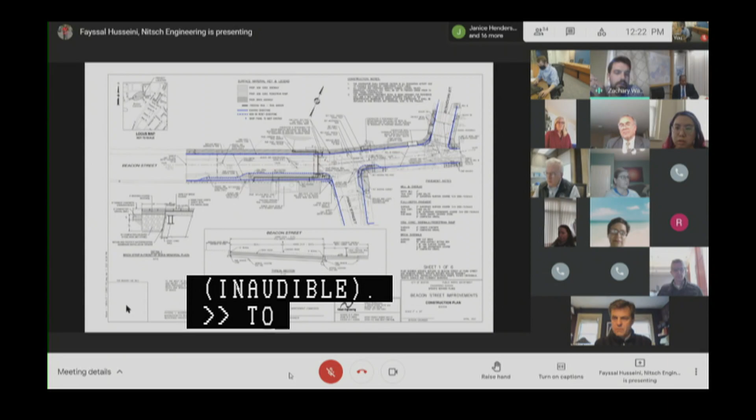As I alluded to in the beginning, the Shaw Memorial will be wrapping up. I believe their current schedule is to wrap up by the end of May. So we're hoping to get the design approved and everything worked out so that we have a window of opportunity to start this construction in June, to get this in over the summer. There's potentially a planned event coming in the fall regarding the Shaw Memorial, so we're trying to dot the I's and cross the T's on all of this.

Getting the materials and everything correct is of the utmost importance. The devil is in the details, and we really want to grind down in the next couple days and make sure we get everything finalized so that we can get this project going. We're very excited about it.

Zach, thank you for your dedication and for your whole team's effort to keep plodding away and make this thing happen. Absolutely, thank you so much.

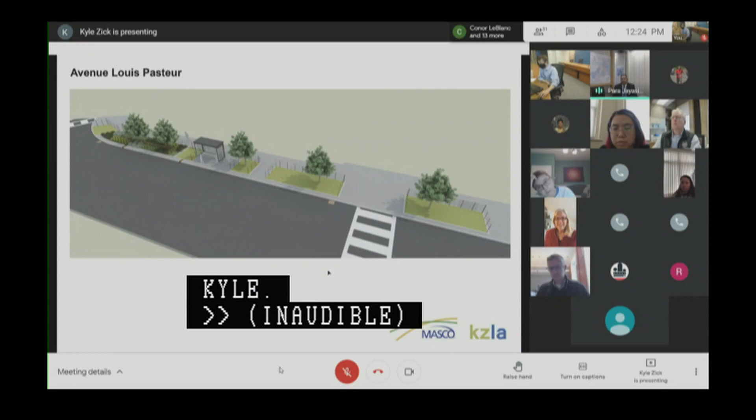Jan, I obviously had an advanced preview on this, and before the illustrious Mr. Kyle Zick tells what he's going to say, on behalf of the city, my applause to MASCO, to you, to all of you for taking the leadership with projects of this nature. Truly, truly appreciate it. Thank you very much. Kyle, do your thing.

My name is Kyle Zick with Kyle Zick Landscape Architecture. The project we have is streetscape improvements on Avenue Louis Pasteur. It's a pilot project right at the intersection of the Fenway. Avenue Louis Pasteur goes from Longwood Avenue to the Fenway. Our pilot project and the scope of this project is on the intersection of the Fenway on the eastern side.

The project has some heritage. The design of Avenue Louis Pasteur goes back to 1905 by the Olmsted brothers, who envisioned it as an extension of the Harvard Medical School to the Emerald Necklace. So it was a formal boulevard, and we know this was implemented. Here's a picture from probably the 1920s in front of Boston Latin School with regularly spaced linden trees. These trees reached maturity in the early 2000s.

MASCO has been a great steward partnering with the city of Boston to nurture these trees, but they've gone past maturity and declined, and over the past 20 years we've actually lost a number of those large trees. So MASCO has been committing to figure out what is the succession plan for these trees to make the original vision of the boulevard true again.

It was a great opportunity to not just repeat what was done in the past. We want to have the tree-lined boulevard, but is there an opportunity for the street and the streetscape to do more? In fact, could it actually do more in terms of stormwater treatment? After initial conversations with PIC engineering and the Boston Parks Department, they encouraged us to continue, but instead of going forward with a large-scale project for the whole boulevard, to actually start a pilot project for a small area to evaluate different green infrastructure practices and techniques in this location.

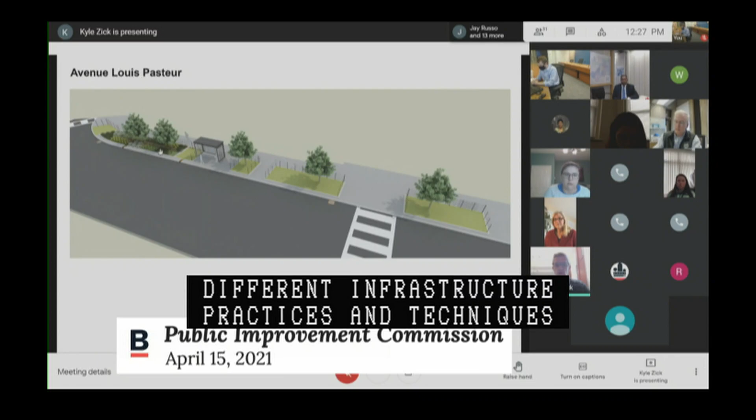The rain garden is what you would expect. It's a concave landform where water comes in off the roadway and the public sidewalk into a forebay and then infiltrates. The other green infrastructure practice adds a new catch basin. That water comes in and then is infiltrated through under-drainage under the lawn.

We've worked actively to have two local professors agree to do monitoring over a 3-year period for this project: one professor in civil engineering at Wentworth and one professor of biology at Simmons. They will do water quality testing of water coming in and out of these treatments to monitor water quality, chemical composition, volume, and flow, and also on the horticultural side, the health and vigor of the trees and plants.

Hopefully after the 3-year period, we can share that information, which would inform other city projects, and also decide which technique is going to be best going forward for the avenue. Our PIC plans are shown here - this is about a 200-foot stretch along Avenue Louis Pasteur, and as I said, we have the rain garden practice and also the subsurface infiltration. I'm happy to answer any questions.

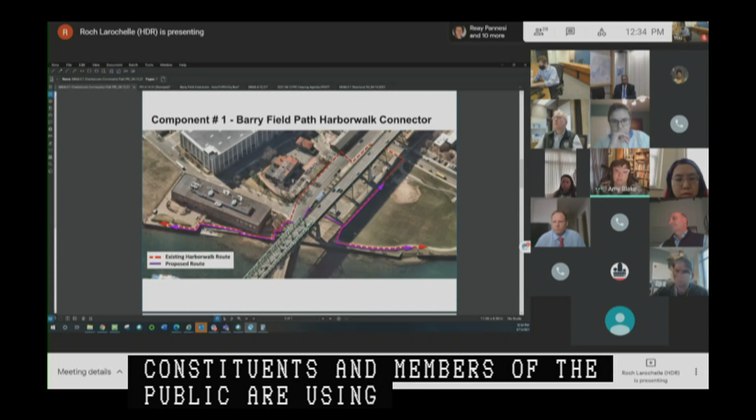The purple line going under the Tobin Bridge — I love this picture because the aerial view and the levels of change really highlight what's going on here. The purple line will go under the Tobin Bridge and then up to Chelsea Street, and will then take you down to the Harbor Walk that goes into the Charlestown Navy Yard.

And with that, I will turn it over to Roch Larochelle from HDR.

Thanks, Amy. Appreciate that. Thank you, everyone, for hearing us this morning. We really appreciate the time. This has been a really exciting project for us because of the impact that it's going to have on the community. So what you see in front of you now, we're going to walk you through a little bit of the history on where this came from.

This concept was developed back in 2019 by Massport and was presented to various city officials at that time. This was a starting point for us in looking at this project, and as you can see on Chelsea Street here, it provides this connection down to the Harbor Walk and down to the ramps in this area. The proposed feature was this stair and ramp system that would make this connection to the existing Barry Field concept. Can you see my cursor, or does that not come through?

We can see it. Okay, great. Thank you.

Looking at the original concept done in 2019, this shows Chelsea Street up above, and then there's about a 6.5-foot drop down to the park below. In the foreground, you see the piers for the Tobin Bridge overhead, which is an important feature. This graphic shows the original concept and how to get down from Chelsea Street to the park below on a ramp and stair system. This is where we started from with the overall concept.

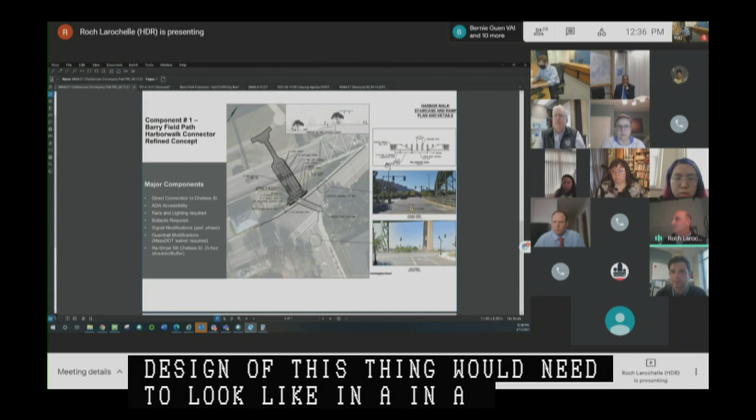Next, we developed a series of alternatives that pushed that forward to the next step. We provided this crossing, very similar to the original concept, and started looking at what the overall design of this thing would need to look like in the vertical realm, developing concepts that would take a look at how to break the existing aluminum 3-bar rail that's out there.

This is a retaining wall. The aluminum rail sits up on top of that. There's some work that had to be done in coordination with MassDOT to break that rail and make room for that opening. And that's what it looks like out there today.

If you can, I'll zoom up on that a little bit and give you a better view. So that's coming out of 16th Street, looking due west to the intersection, and we're looking at breaking the rail right in this area. You can see from this graphic there's a signal post, a mast arm here, and another signal post here, which actually sits down below on the park side at the bottom of the retaining wall that's there.

Bear with me a second.

So the major components: it's a direct connection to Chelsea Street, it's ADA accessible, there'll be rails and lighting required, and there's going to be some bollards — I'll show you that in a minute.

Guardrail modifications required early coordination with MassDOT to break that rail and submit a waiver request, because they have jurisdiction over any modifications to that existing rail system out there. We've also had communication with the City of Boston, their structural folks, as well as other city departments. One of the other things we're offering is to restripe the Chelsea Street Bridge all the way to the other end — right now there's no striping out there, so we're going to stripe it with 5-foot shoulders to guide traffic a little better along the way.

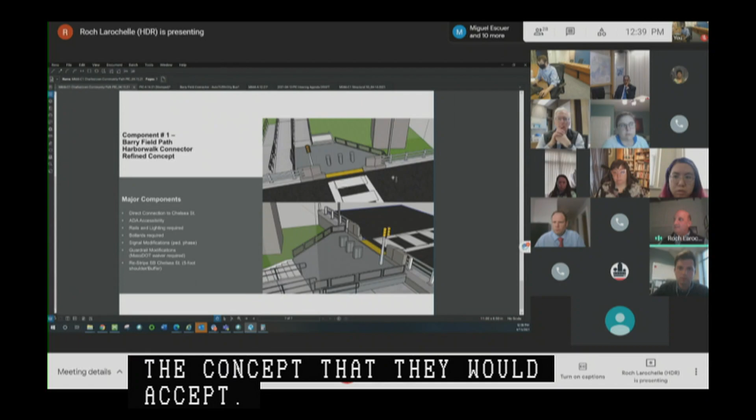This was done in coordination with both the city and MassDOT in coming up with a concept they would accept. We're working with MassDOT on a guardrail waiver request to break the rail and create the system here. Coming directly off the street, there's a 10-inch curb on top of the retaining wall, and then that drops off today off the backside.

We're going to be creating this platform here. It's precast concrete panels up on top, supported by poured-in-place walls on top of helical piles down below. Then the ramping system takes off like this, and the stair system goes down, making the ultimate connection to the path down in Barry Field.

This here is 12 feet wide. You can see we have the composite yellow detectable warning panel within that 2-foot strip. This helps make up a little bit of the difference between the existing road gutter here and the precast panel that's going to sit level back there. All of this meets ADA requirements for that ramp system.

We're not doing any work in the roadway in this area. We're not touching the road grade or any of the drainage. We're going to maintain the existing gutter that has water flowage along the curb line here, and that's going to continue to go to existing drainage systems as it does today.

This is just a different view from the backside. You can see we're relocating one of the signal poles here, which will be deck mounted to replace the one that goes down to the ground today. And these here are vehicle barriers in lieu of bollards. They needed to be designed into the deck to withstand impact loading from vehicles that may enter through here and protect them from going over and down the stairs.

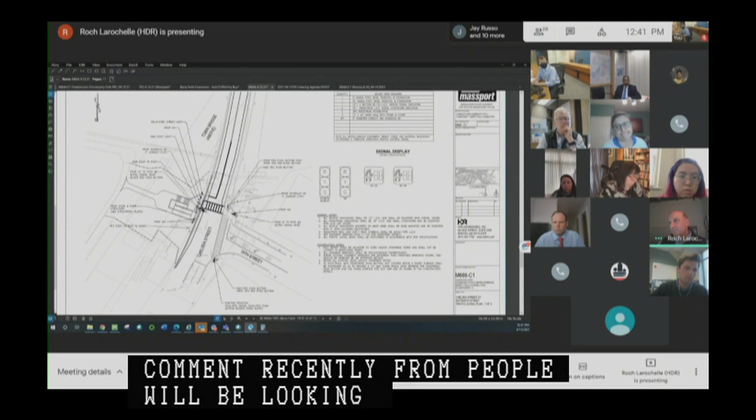And then the traffic signal post is going to be here. We're not touching the existing mast arm that sits right here—that's staying right where it is, not being modified. We're going to retain the existing traffic signal post and all the heads. Again, we're just making modifications to this one here, which is the secondary coming off of 16th Street.

One important feature to note is the location of the Tobin. So I want to point that out. Oh, wrong tool.

What you'll see here is the piers to the Tobin, and more importantly the foundation, the footing. In coordination with MassDOT, we spent quite a bit of time looking at what offsets were going to be required, because they have modifications and rehabilitation planned for the bridge piers out there. They wanted to make sure we had clear distance between the piers, the footing, and this new structure for perpetual maintenance and access.

There was a lot of coordination with MassDOT early on to determine where we could place this. The original concept had more of a crossing coming across the street. We wanted to push this as far north as possible so the crossing would be more of a 90 degree angle and reduce the pedestrian walking length. The result is this odd shaped design, pushed as far north as possible while maintaining clear distance from the footing. That restricts us from moving the system any further north and dictates the ultimate location of this opening.

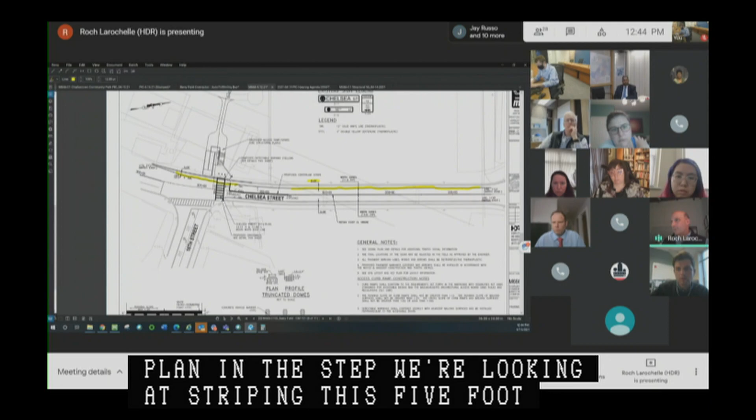So this is the current proposal: to come across here with this 90 and make modifications to the signal systems. The other thing you'll see is the striping plan in the set. We're looking at striping 5-foot shoulders. Right now there's nothing out there, and the intent is to provide a formal shoulder, pushing traffic further toward the center line and providing a buffer between the edge line where pedestrians will be coming out onto this platform on both sides of the road.

A little bit of detail about what this opening looks like. This detail here will look like this. So this is the new concrete end post. The guardrail is going to continue this way and this way, the existing aluminum bridge rail. This is the existing gutter line, so drainage will continue to flow this way. This will be rebuilt here.

There'll be a new detectable warning panel here, 2 feet wide, meeting grade requirements. This whole panel back here will be a precast panel set to make up the top part of that entire deck up on top. One more.

To get into a little more detail, this gives you an overview of the site. There'll be a need to remove the existing rail, the existing granite curbing, build the concrete end posts, break the rail, and build this whole precast concrete deck, sitting it on top of poured walls and helical piles. That comes down and matches an ADA-compliant level landing area, 30 feet wide, ultimately truncating down to an 8-foot wide path to make the connection to the existing path.

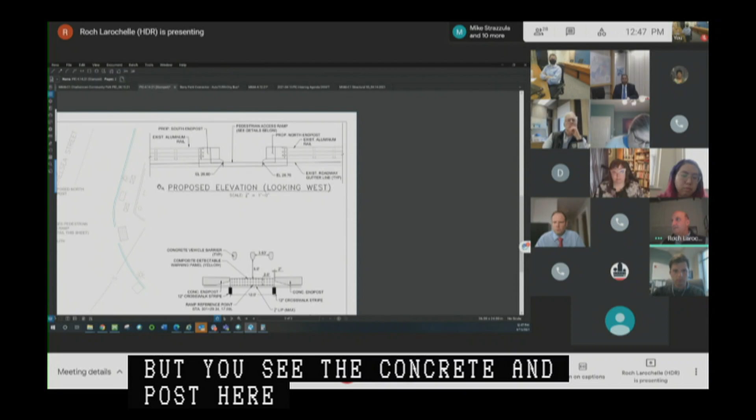Grading on the panel: this was designed for a 20-foot wide deck, and it will be 1% from front to back. Along the back side, this will all be level. Todd, one thing I'll point out is that this elevation is incorrect, it should be 2676, so we'll get that updated on the revised plan. But the intent is that this is all 1% to the top of the stairs and the top of the ramp, level across the back. The front half follows the road grade, with a 12-foot wide opening, stairs and ramp system.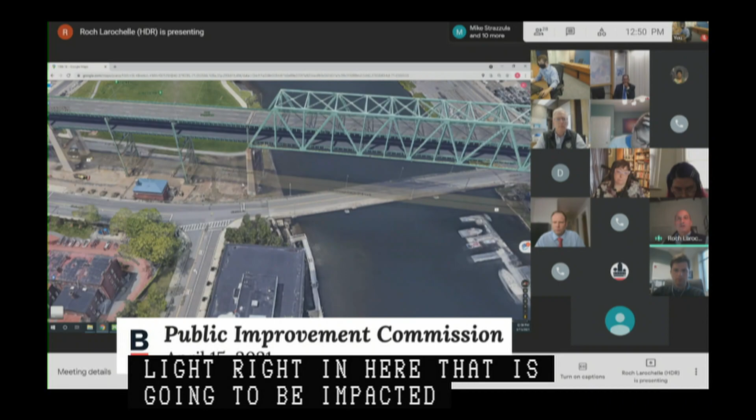There's also a street light right in here that is going to be impacted because it conflicts with the new concrete ramp and stair system. That is actually going to be relocated up above on the stair system, so you're not losing any lighting in the intersection. The lighting that's there today will be maintained tomorrow.

Amy, did I forget anything? No, I think you covered everything pretty accurately. You probably want the PIC drawings up for comments and questions.

Amy, if I may, sorry—go ahead. Amy, if I can ask Raj to put that street view at the intersection itself, because it will help me articulate some of the tiny comments I had. So when you zoom into the actual street view before this, when you were showing the guardrails and all of that good stuff... All right, I'm going to have to reload it, Raj, sorry, just go back.

It's 12:51 and I'm so nervous about the fact that we are keeping this one of the longest. So here's the punchline: first of all, thank you so much for bringing this project to this point. Absolutely exciting, but the devil is in the details.

HDR team, to whom does the bridge belong, the bridge that has the railing? The bridge belongs to the City of Boston. Okay, so have you had any conversations with them to figure out, because you are going to ditch the railings, and I saw in your presentation some conversations with Mass DOT—have those come to fruition, or is it still engaged in terms of the waiver requirements for opening up that railing?

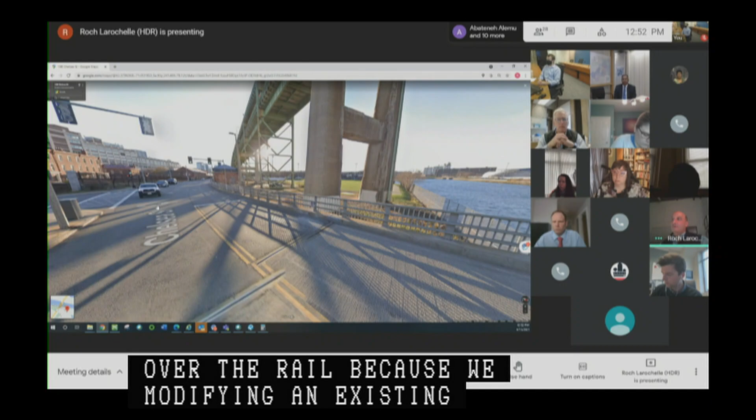That's a good question. Mass DOT does have jurisdiction over the rail because we're modifying an existing aluminum rail system, which currently doesn't meet crash criteria. So through Federal Highway, Mass DOT has jurisdiction over any modifications being made to the rail system. We have been engaged with Mass DOT on a waiver request that has been submitted. Amy, do you want to give an update on the status of that? Sure — we submitted it once, I think it was mid-March, and then Mass DOT came back with comments, which resulted in the vertical concrete end posts for the openings that HDR has shown you since.

We sent them back to Mr. Bardow of MassDOT, and through many attempts to getting a response from him, we have not been issued any formal response. But given the nature of this project and the request to move quickly, we have let him know that we're doing our best and we need to move forward with the design, and I will continue to pursue a formal response from him.

So Amy, tiny bit of awkwardness because that railing belongs to, I don't want to sound pompous by saying me, okay? But I do know what my left hand and right hand are doing. So the bridge belongs to the city of Boston and you can't be opening that thing. Slow down, please don't misunderstand my comments. You are 99% there, you're on that one yard line, okay? So, but this stuff is important because of a variety of reasons.

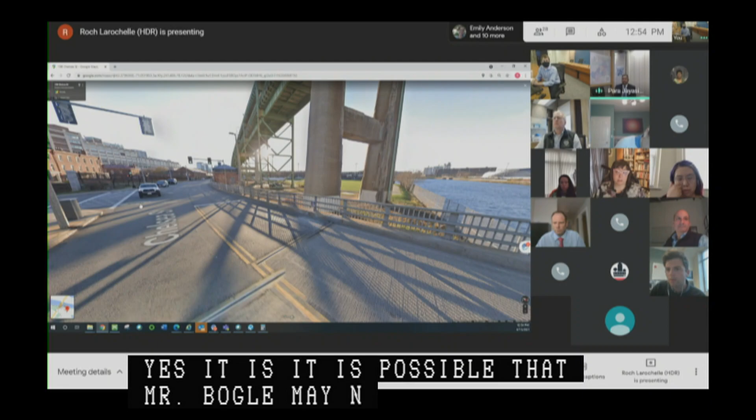Okay, just trying to understand, just trying to get things to do. Second thing, so we are going to introduce a pedestrian path of travel, and I'm sure Ms. Cording can add or subtract. The street lighting or the amount of lighting in this area is going to be hypercritical because you do know...

...the most vulnerable element, which is our pedestrians, are going to be in conflict with those vehicles transporting the trucks that are coming out. And very recently, we had a very awkward interaction with one of those transport vehicles and a Charlestown resident. I don't want to elaborate on that because that person is no longer with us, and it was a horrific accident. So here you are trying to introduce a pedestrian path of travel over a bridge where the trucks are used to going sort of fast, okay?

So please don't minimize the new intrusion of parents with little kids popping out over here wanting to cross. Okay, so lighting has to be absolutely paramount, moving a light over there. So Raj, your team has to do a thorough analysis of the adequacy of street lighting in that area, because the shadows that are cast by the Tobin tend to be a little bit weird over there, okay? I'm not trying to blow this out of proportion for the sake of polluting the airways with what I'm saying, but you folks really need to understand the conflicts that are there with the heavy vehicle transport trucks.

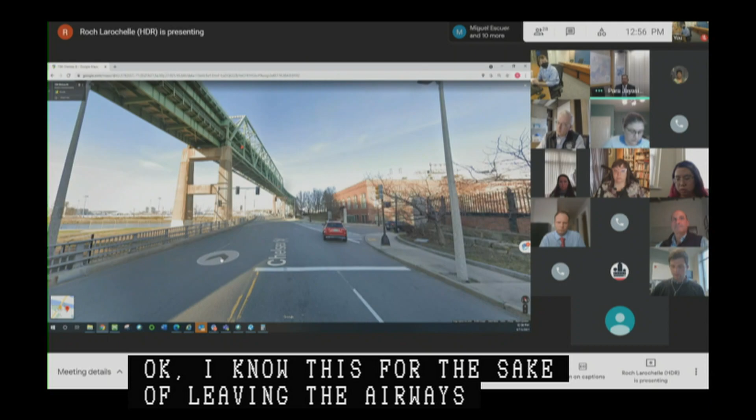And when those trucks leave the auto port, they have only one thing in mind: get off Chelsea Street onto I-93, okay? It's like, damn it, I'm gone, and they are not looking for little kiddies crossing over here. So I cannot overemphasize or underemphasize, whichever the proper emphasis, as to the safety requirements, okay, and including the red clearance intervals. When those kids hit the pedestrian button, there has to be an adequate all-red clearance interval so that the truck has had enough time to jam the brakes and stop before the kids step out into the crosswalk.

So Raj, I'm sure, I'm 100% certain you guys are top notch on this stuff. Please come through for me. Okay, so that's what I have. Not sure whether I asked fellow commission members to give any thoughts. If not, I'll open it up again.

Thank you. The same, along the same lines of pedestrian safety in an area where we're introducing a new crossing, I think we would encourage the team to look into splitting that ramp on the northeast side, just because now it may be a compliant condition. However, if you add another crosswalk, you're changing the function of that ramp, and it will no longer be compliant because it's functioning as an apex ramp. So we encourage the team to continue to look for solutions to better that crossing, because I think this project will be extremely beneficial to the community in creating connections to both the Harbor Walk and the Charlestown community.

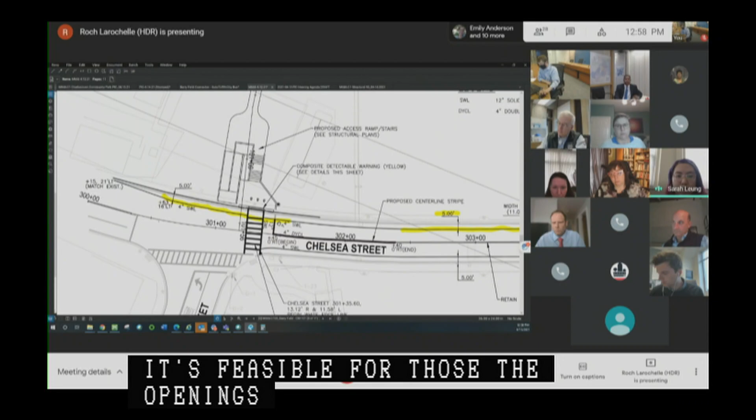Additionally, I did want to clarify the condition of the ramp on the Barry Field side. We just want to ensure that there will be a 5-foot level landing on that ramp outside of the bollards, as well as if it's feasible for the openings of the bollards to widen up to 5 foot clear, just to align with our city standards, and to ensure that accessibility through those bollards isn't impeded.

Okay, Sarah, if I may. BTD Active Transportation made the same comment about the ramps that Sarah did, so I just want to say that we agree.

Okay, we can certainly look at widening out the spacing here. This is certainly a 5-foot setup, set to be 5 foot here, and this is about 15 feet back here. So there's certainly plenty of distance behind that.

As far as relocating this, we talked a little bit about the condition here that we're working with and the difficulties in moving that crossing any further north. We've moved it as far north as we think we can. We'll continue to take a look at it, but we were trying to minimize the travel path and not end up with an angled crossing.

We certainly understand that maybe if there's an adjustment to the crosswalk at 6th Street, that can be adjusted to ensure that there's a dedicated ramp for each crossing. We certainly encourage the team to take a look into that. And I just want to clarify that the 5 foot from the ramp to the bollards is level as well. Yes, thank you, Sarah.

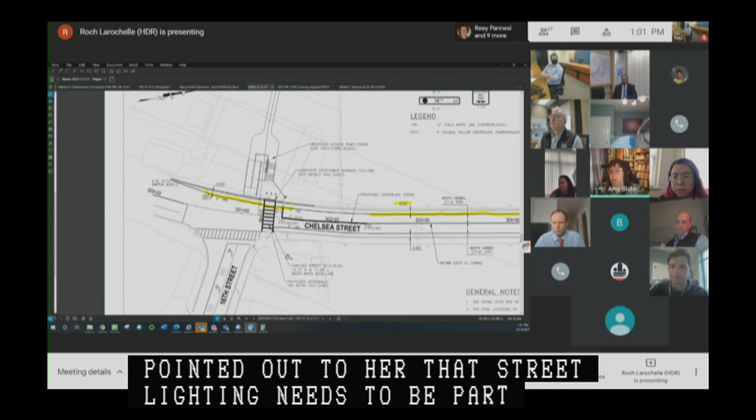We're definitely going to look at the idea of potentially splitting the pedestrian ramps on the northeast side of 16th Street. We just need to be cognizant of the amount of city utilities that are on that corner alone.

We just want to make sure we can make this a successful project. We don't want to adversely affect the feasibility, so we'll also have to look into potential for additional funding sources.

That's all, I'm not sure what else to say. We'll look at it, we'll definitely give it a good look.

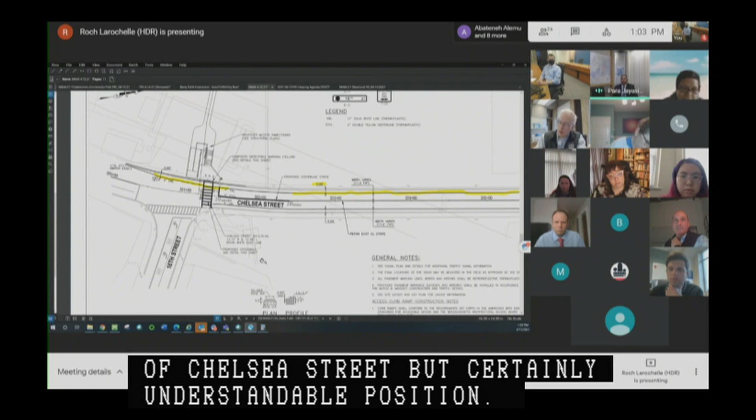So, project applicants, do you think two weeks is enough for you to sort things out? Because I think one of the key issues is the waiver from Mass DOT bridge section. I'm okay signing this up for two weeks, but I will be very uncomfortable voting on this without getting that waiver approved from DOT. So I'm just trying to figure out if it's two weeks or four weeks or whenever, what's that time frame, keeping in mind we are all excited to see this happen.

Yes, yeah, no, our goal is to have everything for the two weeks.

We're preparing, provided everything goes well, to advertise this mid to late May. Excellent, so it's all rowing the same direction.

If there's anything we can do to help, but this waiver decision is definitely Mass DOT's, because it's a huge public safety issue with the trucks coming off that bridge.

I am a little bit anxious, not nervous, anxious, about creating this weird, awkward point where if a truck tries to jam the brakes and suddenly you have an opening. Those railings were there for a good reason.

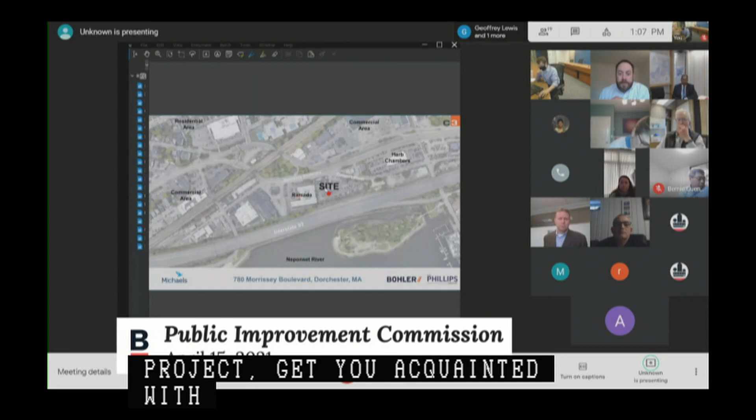So when that pops up, it'll show you where the site is. I assume you're seeing that now? You have I-93 here, so the bottom lanes are going northbound into the city, southbound, and we're on the southbound side. Currently, there's a restaurant that's been vacant for quite a while, a couple years now.

The Phillips House, you've got the Ramada Inn. Herb Chambers, I believe, has been in front of this commission pretty recently for some repairs associated with their project, also along Freeport Street. So hopefully the area is familiar.

Whoops, why is it not going to my next slide? Apologies, last thing we need is technical delays.

There we go, okay. Images of Freeport Street, and our property is shown in red here. Freeport Street is city jurisdiction. You can see there's no sidewalks today.

So there are some sidewalks being put in right now by Mass DOT just around the corner, and then this is our project here, and we'll get into the frontage. The bottom image just shows what's on site today and what's happening in front, which is a lot of pavement, not a lot of direction, and not a very friendly pedestrian zone. So we're hoping to change that.

Okay, there we go. So this is an image of the proposed development. High level, it's a 219 unit residential rental building. There's 136 parking spaces, mostly in a podium underneath the building, with a couple surface and visitor spaces outside. There's 219 bicycle parking spaces, so one per unit.

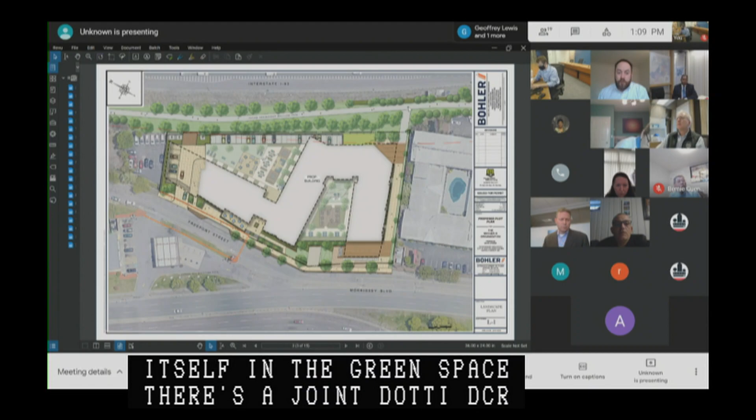In the green space, there's a joint DOT-DCR proposed bikeway. Based on everything we're being told, this bikeway should be coming online about the same time as our project, hopefully a little bit ahead of schedule. Our best information is that is going to happen.

The DCR owns Morrissey Boulevard, which is everything outside of this orange line, and this is all under DCR control. Then Freeport Street, and staff may have some input here as well, but my understanding is Freeport Street is a city-owned roadway currently under the custody of MassDOT for maintenance, part of the central artery improvements, and that is actively in process to be turned back over to the city. Todd, if I've glossed over that too much, I'm trying to give folks an understanding of who has what ownership around the property.

Yeah, that's generally accurate. The city and MassDOT are under talks to turn Freeport Street over to the city. That has not happened yet, but that's the reason this project is before PIC.

One other piece: there is a pathway we're proposing as part of this project, going from the DCR sidewalk, which we're widening to about 10 feet. We're proposing a bike path to connect to this. Obviously that's DOT jurisdiction, in coordination with DOT and DCR, and we're continuing to work with those folks, but both parties think that's a good connection, really want it to happen, and we're committed to making it happen.

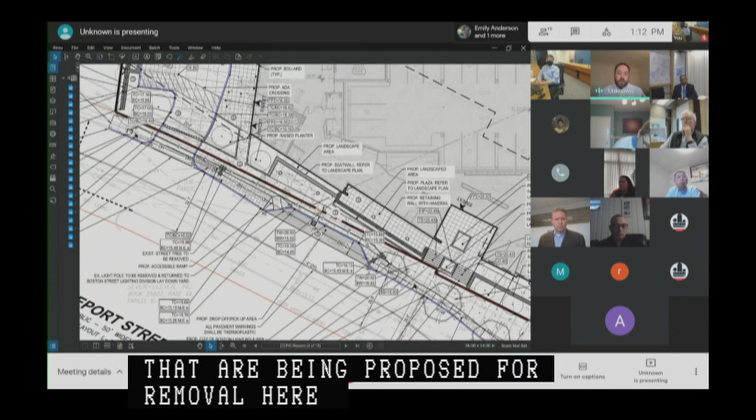We do have two street trees proposed for removal here and one here, right in the middle, especially this one, which is right in the middle of the proposed sidewalk. So to get the full width sidewalk in these areas, we're proposing to put some trees on the private property, a hybrid approach, putting some trees at the back of the sidewalk where room is more limited, and then as we get to a wider section, we go back to a more traditional street tree approach. This one would be in the city right-of-way.

The survey line is right here, so we do have more street trees, but these three are technically in the DCR roadway. We're trying to marry City of Boston standards with DCR's, which aren't always the exact same goals, but we've talked to them about carrying Freeport Street as more of a City of Boston streetscape.

And then as we get around the corner here to DCR, they want a 10-foot wide clear concrete sidewalk, so a little different approach as we get around that portion. We've again moved street trees to the back of the sidewalk there.

Other things we're considering, and I'll get back to the details of Freeport Street, is Morrissey Boulevard. I'm sure folks have heard there's a major project coming with Morrissey Boulevard, with potentially some elevation change, as well as trying to get it back to a more parkway-like feel. We've been working closely with DCR to make sure what they're planning to do is not in conflict with what we're doing.

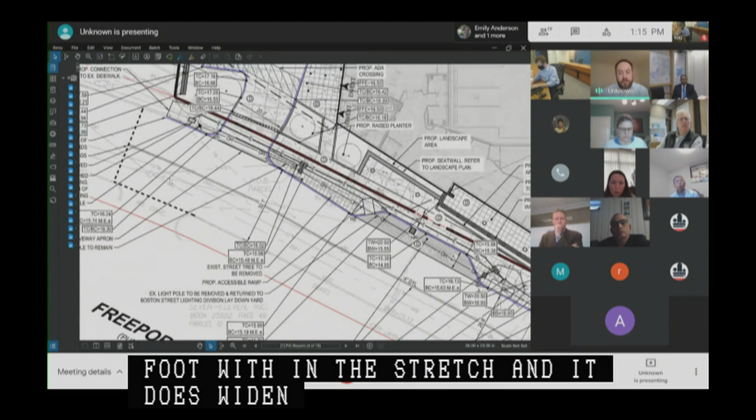The only other element we're introducing here is a bus stop. We're pulling the curb line out a little bit, not for the bus stop, but more to get Freeport to effectively a 27-foot width in this stretch, widening out to match what's happening at the end of our property line, closer to 32 feet. We heard a lot of feedback and confusion around this corner, most of which is what we're working with DCR on. They were supportive of pulling this curb line out, mostly so we could get a 10-foot sidewalk here, but that does play into how we tie back into Freeport. So when we pull this curb line out, it creates the opportunity for wider sidewalks.

It also creates the opportunity for this shuttle, which is currently serving the Ramada Hotel. We're effectively adding a stop for this project and for these residents. The shuttle goes to the Red Line, most importantly for a residential project, also to Logan Airport, and there will be stops added for local amenities such as a grocery store. So we think that's a real benefit to the area, minimizing traffic and single occupancy trips in and out of this project.

Our curb location is a new curb cut we're proposing, a 20-foot width curb cut. Currently the curb cut is at the intersection, and there's already a lot going on: Morrissey Boulevard connects, Freeport has through abilities, this lane goes through on the access road, and Morrissey is one-way. From day one we were told that if we do anything positive with this project, it's getting that access point as far away from this confusion area as we can. So this is where everybody agreed is the best access point, moved down quite a bit from where it is today. Hopefully from a roadway and traffic standpoint that's a real positive.

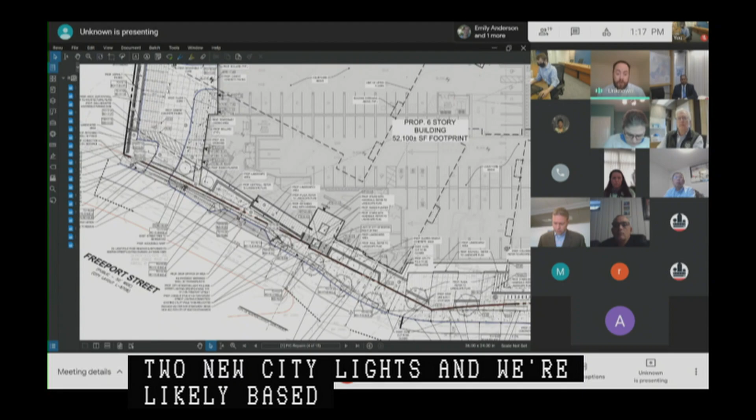We have other utility improvements: shadow fiber conduits following the lighting, upgrades to the stormwater system at the 1.25 inch infiltration system, full curb to curb mill and overlay in Freeport Street, and two new city lights. Based on comments received today, we're likely adding a control box for Boston Lighting. There's not a lot of decorative lighting down here, so this gives them the ability to start, acting as a catalyst, and the control box will let them continue expanding it as the opportunity presents for the city or other developments. The shuttle program, again, we think is a great benefit.

So I probably went longer than I implied I was going to. I'll turn that back over to the commission for any questions, and we'll end with this, which just shows where the easement's going. There's 412 square feet along Freeport being proposed as an easement. And the pretty picture, so everybody can end their day feeling good here.